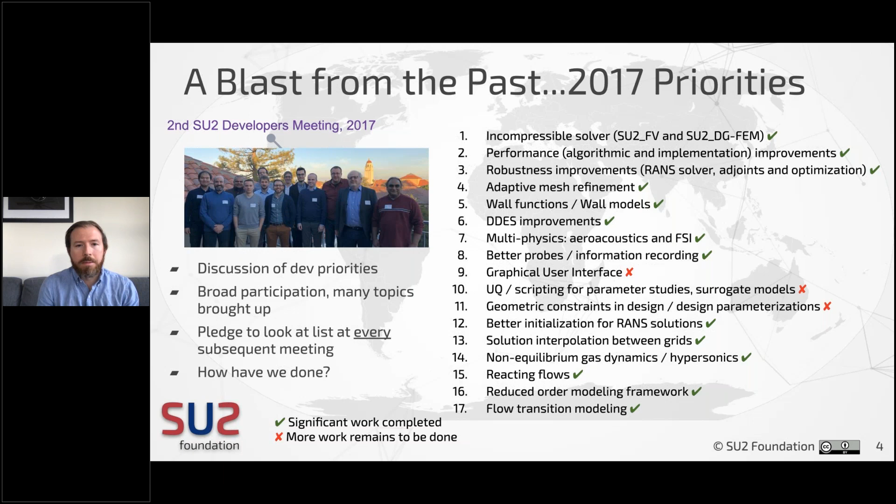Let's talk about 2019 quickly. So last year we did things a little bit differently. What we had was a set of breakout sessions where we tried to divide up the folks that were in attendance into some groups so they could talk about separate areas in smaller groups a little more effectively. One team was looking at MDAO, another was looking at flow physics, and another was looking at robustness, performance, scalability, and V&V. Sort of a long acronym, but we broke into these groups and sat down and talked about what things we wanted to work on in the code in those areas and how we were going to divide that work and tackle it.

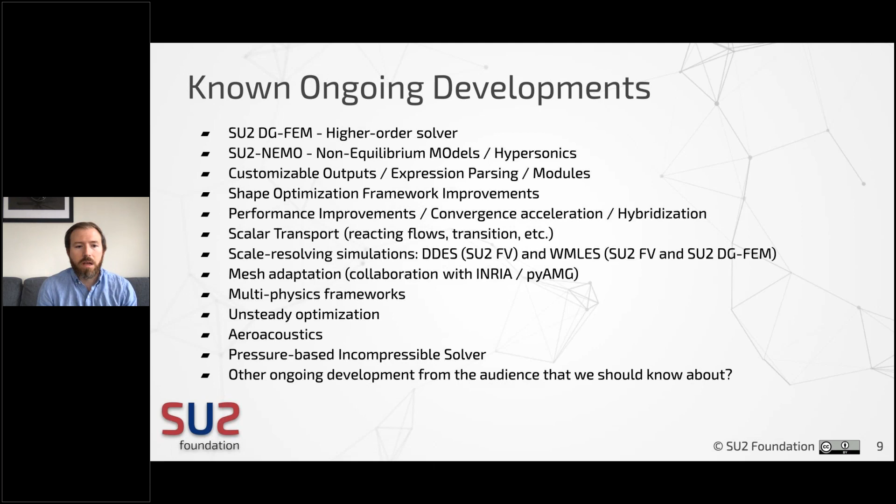What you see is basically a high priority for your needs, or things you're really interested in. A lot of these topics folks are already working on, and there's a lot of work already happening, but we want to get the pulse of the community so we know what resonates the most with people, and how we can focus our development over the coming years.

So we prepared six polls for all of you to give us a little bit of feedback as to how we should direct our efforts as a community over the coming year, and as Tom mentioned earlier, what kinds of things you would like us to be talking about next year at an annual conference that hopefully will take place in person.

So we'd like to give you a little bit of an idea of what these polls are going to be about, so you get the rough categorization and the various elements in there. There are six, as I mentioned, and we'll go through them one through six.

The first one talks about issues related to numerical methods, basic discretizations, and robustness improvements inside SU2. Again, a lot of things we've talked about through the years, but if you select some of these, we'd like you to give us feedback saying that if it's being done, we need to do more of it, and if it's not being done, we need to put it on the list of things we're actually working on. So you see things like linear and nonlinear solvers, new preconditioners, algebraic multigrid, higher order discretizations, which include a lot of effort in DG at the moment.

But maybe other things within the finite volume solver, the ability to be more robust to different transients in the initial solution, but also to poor grids, to anisotropically adapted grids, which there'll be a talk on afterwards, and then also just investing effort in advanced discretizations.

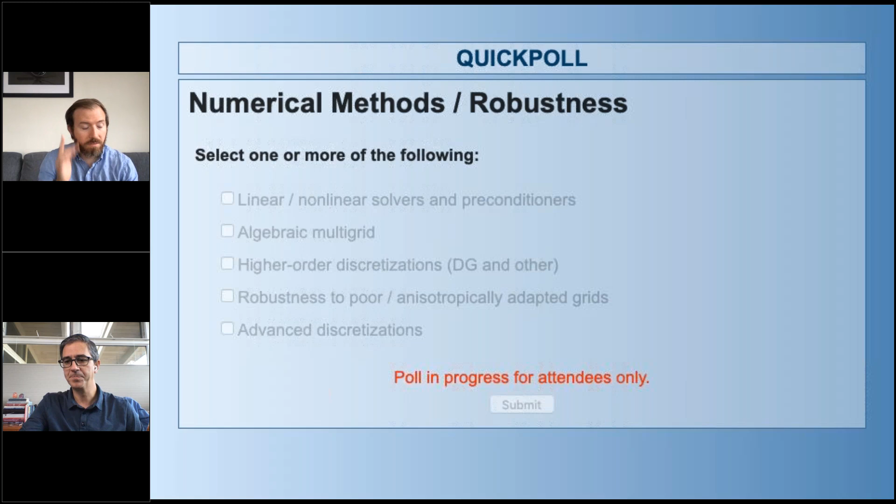So again, you're not simply voting for things that we're not doing that we ought to be doing, but things that we are already doing and need to continue to do well and do more of if possible. So I'm going to stop the poll now. About 65% of you have voted. Let me share those results. We won't do a lot of analysis, but this is very useful data that will frame the rest of the conversation. That's poll number 1. You can see robustness is important, and linear solvers, nonlinear solvers, and preconditioners are quite important, so we'll continue that. High order discretization comes in 3rd.

Let me throw up the second poll, which is about physical modeling. Again, we'll give you a minute to fill out the entire poll. Go ahead and click away as to what you think are the most important things to pursue in physical modeling over the next year. Of course, these are sustained efforts that have been going on for a while now, but we're quite interested in your opinions. 20 more seconds, and then we'll stop the poll.

Already 60% of people have voted, which is amazing. Thank you for being so engaged. Yeah, that's great. 5 more seconds. If you haven't made up your mind, go ahead and do that, please.

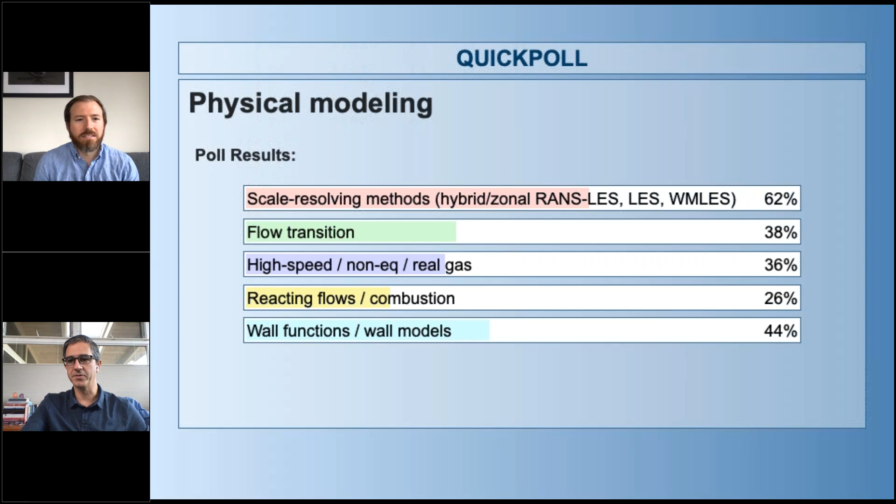And here we are. Let me close that poll and share the results with you. You can see it's a bit of a mix, but scale resolving simulations is probably in the lead, and there's a lot of interest in the other various areas as well. We'll take this into consideration, but in the interest of time, so we have lots of time for discussion, let me just keep going.

The next poll is about performance, and we focused on strong scaling because that's typically the use case we see in SU2, but it's not only restricted to strong scaling. Go ahead and vote for the top 2 things you want to see there.

I have to say, seeing the results, not many surprises. Again, almost 60% of people have voted. You guys are amazing at responding very quickly, so we don't have to spend very much time on this. I think 3 more seconds, and then we'll stop.

Let me show you the actual results of that poll. We have hybrid OpenMP/MPI, GPU, very unsurprisingly in the lead, and then the other 3 very close to each other. Excellent there. Yeah, that was pretty even.

So let's go to multi-physics and interfaces. Very curious as to what you guys think are the top things we ought to be doing.

I'm sure there are others, by the way, and while you're voting, Tom has mentioned this before, but in either the chat window or the questions, if there are things you don't see in many of these polls, please throw them in, because we will put together a survey for all of you after the conference, and we'll add those new things in.

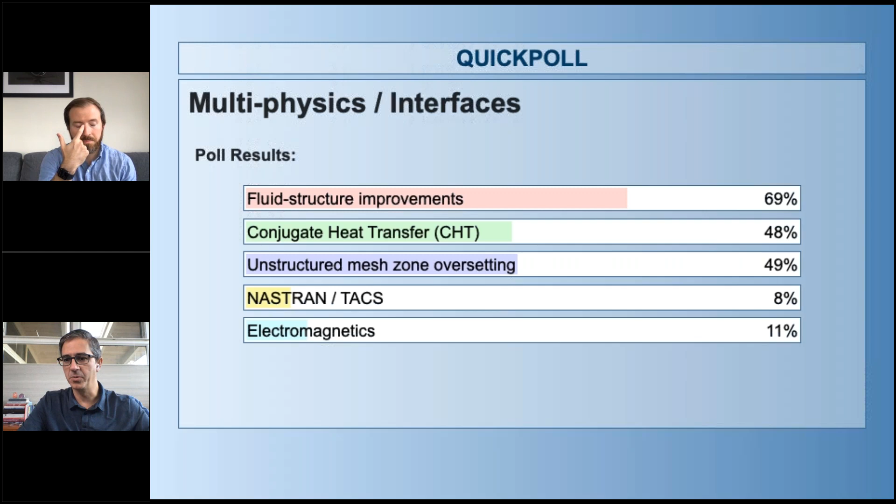2 more: adjoints and optimization. Please do the same thing, top 2 choices. What are the things you'd like to see more work on during this particular year?

Again, the votes are coming in very quickly. I'll share those with you in about 10 seconds or so. We're at 50%. 5 seconds, and we'll stop. Let me show you those results.

Very interesting as well, Tom. I don't know what you think, but obviously shape parameterization is something we need to continue to pursue. A lot of mesh deformation approaches to go with those new shape parameterizations, and then optimization is good.

Then last but not least, this is a really important one, although it's probably the last thing people want to work on. Please go ahead and select, just as you've done, the top 2 among the 5 choices you're given here.

So again, better code organization. It's always useful to get people going - unit and regression tests, documentation, tutorials, and so on. And events, and better interfacing with the code to automate various different tasks.

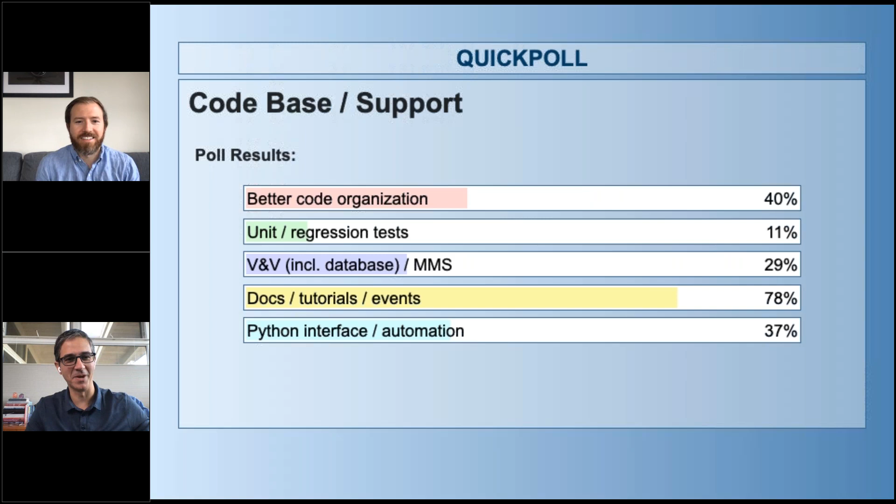So we have 65% voting, so 5 more seconds, we'll stop right there. Let me just share with you what the results of that poll are. Obviously, a lot of interest in documentation, tutorials, and organizing events. So as we have bandwidth to do that, we probably have to pay quite a bit of attention to it. I think that's the most clear one so far.

Tom and I often get requests from people who want to teach a CFD course using SU2. And the first thing everybody asks is, has this been done before? Are there materials that we could inherit in order to prepare such a course? How does it work with students? And so on.

We used to have a version of the code, SU2 EDU, which by the way still works, which is a stripped down version of the solver that is a very good vehicle to actually teach people how to learn CFD and how to write CFD codes, etc. So we could connect with all the people interested in doing this. If you're interested, reach out to Tom and myself or to anybody else on the foundation board - Ruben, Tim Albring, and Eran Arad - and we'll be happy to do something about this. There's been a lot of interest at various institutions, and courses have already been taught in multiple places. So we'd love to be able to facilitate all that.

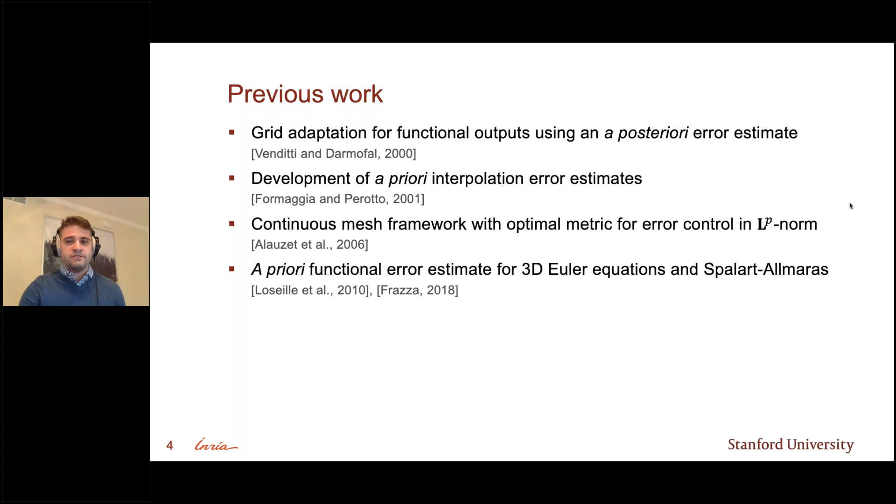It kind of reminds me of this interview with Tom Economon that I saw once, where he said that he judges the quality of a mesh using the eye test. So Tom, maybe at the end of this, you could tell me if this mesh or some of the other meshes you see actually pass that eye test.

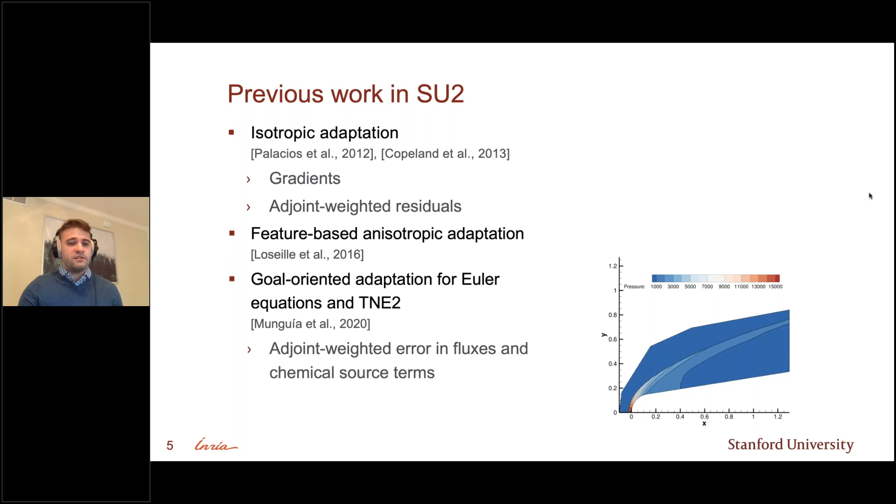And then much more recently, I, along with Wally Maier and Jacob Needels, published a paper at the Hypersonics conference where we did goal-oriented adaptation for the TNE2 equations for hypersonic flows, which consisted of an adjoint weighted error in Euler fluxes and chemical source terms.

And whichever framework you use, whether it's feature-based, goal-oriented, a priori, a posteriori, in order to get anisotropy, we need this notion of a metric space, which I'll describe briefly here. So in our finite volume method, we assume we have piecewise linear elements, so essentially constant gradients in our elements.

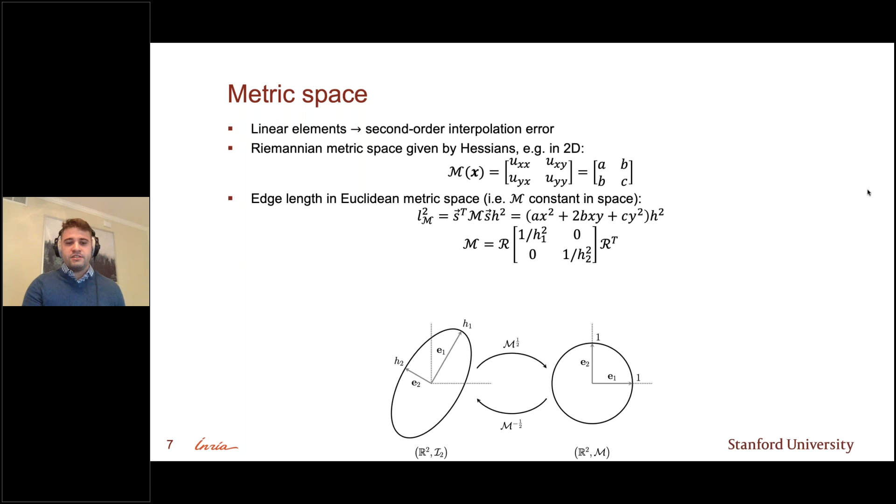A lot of times you'll see people visualize these as ellipses. In order to equidistribute the error, we want a constant length in this metric space. If we set that to 1, the eigenvalues of our metric tensor are inversely proportional to our desired lengths in the output mesh in those principal directions. This makes sense - if we have a shock wave, most of our variation happens normal to the shock wave, so we'd want most of our refinement in that direction, and you'll see elements stretched along the shock wave.

In reality, the edge length is a bit more complicated because the Riemannian space is a continuous space, so we actually have to integrate these metrics in space in order to perform our mesh optimizations. That's all handled in AMG.

I mentioned this before with the optimal metric, but we have this discrete-continuous duality in this continuous mesh framework. The continuous analog of our elements K is our metric tensor M at each node throughout the domain. The mesh X is related to the Riemannian metric space itself. The number of vertices N is related to what we call mesh complexity, which is the integrated density in this continuous space - this is what we actually control in our framework.

So the optimal metric is a normalization we perform in order to minimize the error in some LP norm. We have to perform this normalization because, if you think about it, before we were just computing Hessians, but the scale is kind of arbitrary and very problem dependent.

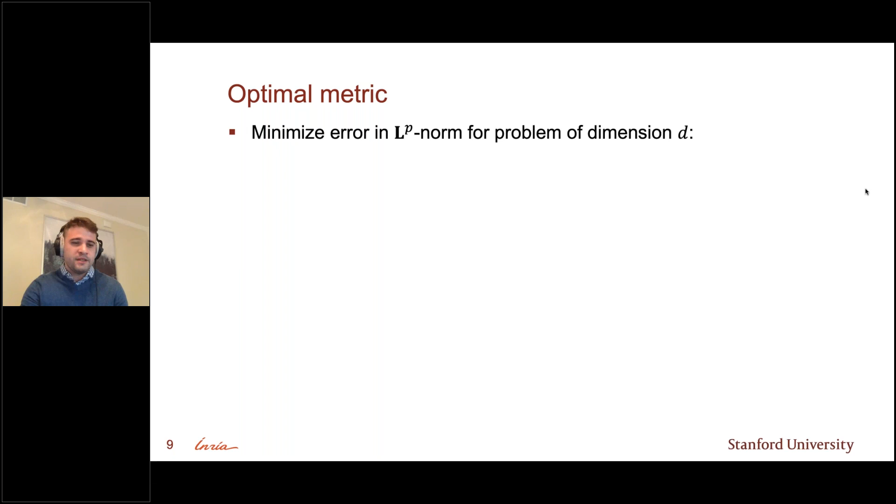The third term is a local normalization we perform in order to damp out small amplitude variations in our metric space. We have two free parameters here: N, which we use to drive refinement in the mesh, and P, our choice of norm, which is mostly dictated by the problem. Larger P's tend to damp out small amplitude variations more.

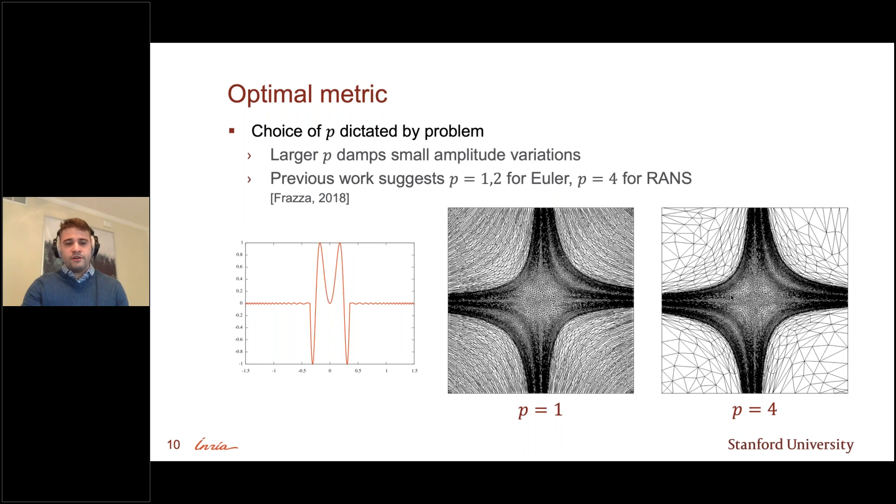Loic Frazza basically suggests in his thesis that p equals 1 or 2 works well for Euler, mainly for capturing shocks, and p equals 4 works well for RANS, where we have different scales in our flow that we need to resolve, and we want to damp out other features.

So in order to get into the viscous error estimate, I'm going to motivate a little with how we do the inviscid error estimate. This is what I, Wally, and Jacob did for our TNE2 paper at the Hypersonics conference. We approximate our error by linearizing about the flux terms and also chemical source terms in the case of TNE2. Our residual is just the standard form of divergence of fluxes minus our source terms, which is hopefully equal to 0.

We assume that our error is an adjoint weighted interpolation error of these terms. H denotes a discrete quantity and U bar denotes our adjoint variables. We want to extract a linearization about F and Q. Q is already in the right form, but in order to get F, we integrate by parts and neglect boundary terms, and what we get is this here.

So now we weight our errors of our Euler fluxes using gradients of adjoints, and now we have an error estimate.

Like I said, we're using Hessians to approximate our error, so we take Hessians of these linearized terms. We have this adjoint weighted Hessian, which is given by gradients of adjoint variables weighting Hessians of each of our Euler fluxes, and adjoint weighted Hessians of source terms. Then we perform the LP normalization that I described before. This works all right for the Euler equations and TNE2.

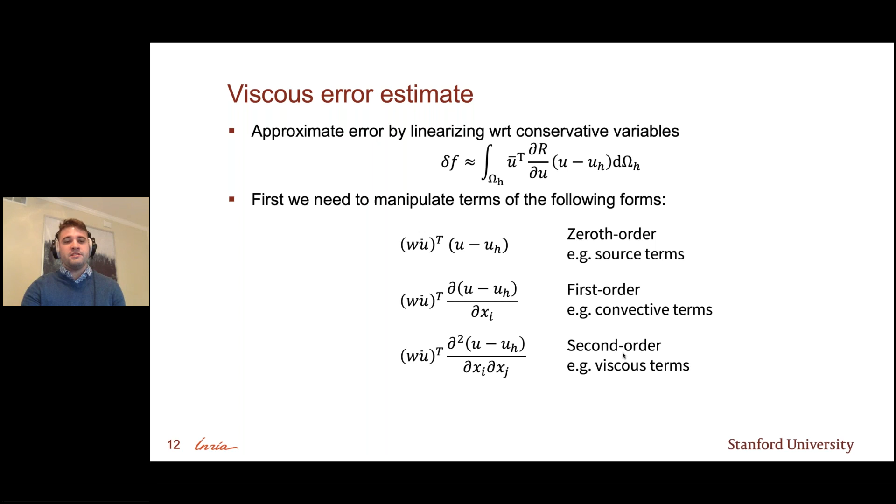In order to linearize these, once again neglecting boundary terms, we integrate by parts twice. So now our error estimate with respect to our conservative variables is this Hessian of adjoint weighted error. These terms W and all these terms come from our Jacobians, which, like I said, we already have in SU2, so that's easy enough.

Just to give a brief example of how we do this: if we look at the error due to the divergence of heat flux in the energy equation, we have this Laplacian of temperature, which we can decompose into a Laplacian of energy and a Laplacian of density. If we integrate by parts the adjoint weighted error of that, then just looking at the energy term, we have this Laplacian of adjoint energy that weights our interpolation error of our actual energy primal variables.

So in compact form, we have this adjoint weighted Hessian composed of 0th order, first order, and second order weights as shown here. Then once again, we normalize that to obtain the optimal metric that I described.

In order to do this for SST, which is kind of a messy equation, I made some simplifications. These blending functions I treated as constant because I assume they don't really contribute much to the error—they're just used to switch between K epsilon and K omega. Quite honestly, I didn't feel like linearizing with respect to hyperbolic tangents of inverse cross diffusion and all that nonsense. I don't treat the limiters on shear stress or production, so I don't really treat these maxes. I just use a simplified version of these terms.

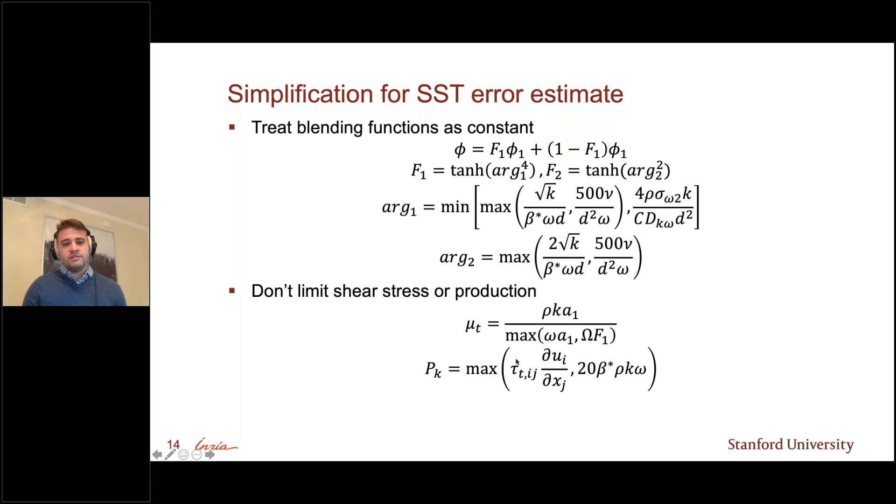But then I linearize with respect to everything else in the equations of motion, including viscosity and thermal conductivity, which helped me later implement actual Jacobians for these terms. And that leads into the modifications I actually made to the Navier-Stokes solver and SST solver in order to get these flows to converge.

Because, like I mentioned, when Victorien Menier first implemented his mesh adaptation framework, he had some robustness issues, specifically with RANS flows.

So one, I store the conservative turbulent variables because while in master and develop we store the primitives, our adjoints are with respect to the primitive variables. Our error estimate is actually in terms of the conservative primal and adjoint variables, so I just store these extra variables in this variable structure.

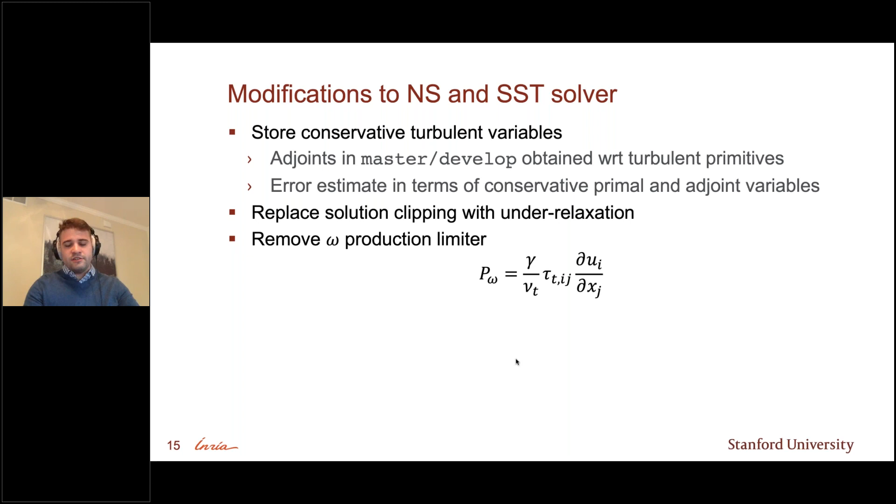I got rid of the solution clipping, which seems to be a band-aid for a lot of other problems in the SST solver, and instead use under relaxation, which works fine with all the other modifications I've made. I also got rid of the omega production limiter, because I think that extra specific dissipation helps with convergence.

Our wall boundary condition for omega is given by this equation, where delta D1 is, as described in the original paper, the distance to the first off-wall node. In SU2, we use the normal neighbor and the distance to that node, but for my highly anisotropic meshes, like the one shown here, that distance doesn't give an accurate representation of what omega should be. Since this equation is based on boundary layer theory, I instead used the actual wall distance to that node. I won't go into detail, but this thesis describes a more stable version of a gradient correction at our interfaces for viscous fluxes, which I implemented.

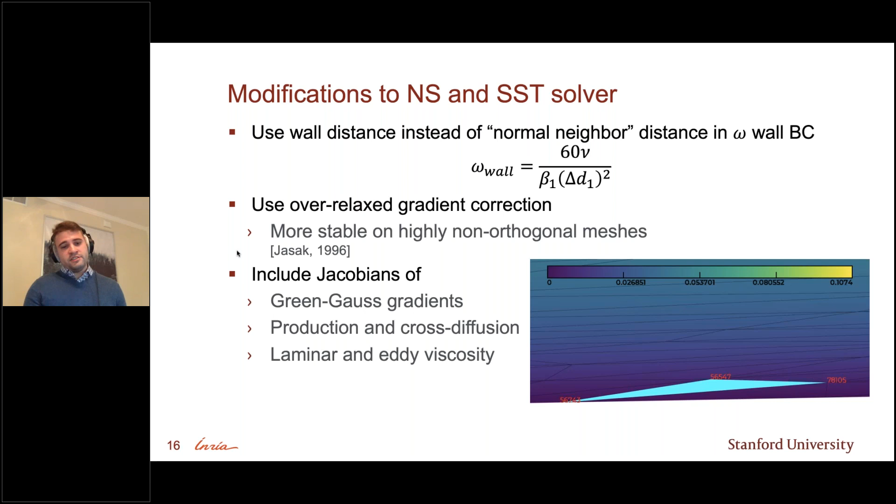I basically linearized pretty much everything that wasn't linearized before. I only did it for Green-Gauss, but I linearized the actual gradient computation routine, whereas before we just linearized the gradient correction terms at the interface. I also linearized the production and cross diffusion terms, and all the viscous and heat capacity terms.

So onto the actual framework itself. Essentially, we have this adaptive loop where we run a flow, adjoint, and metric computation in SU2. The metric computation is just a post-processing routine in the adjoint driver, computing those adjoint weighted Hessians of our conservative variables. I have this external library, mostly written by Victorien, which I converted into an external library. It essentially converts from SU2 format to the gamma mesh format used by AMG. AMG performs the actual mesh adaptation based on this metric and interpolates the solution onto the new mesh, and this whole process repeats until we converge our problem.

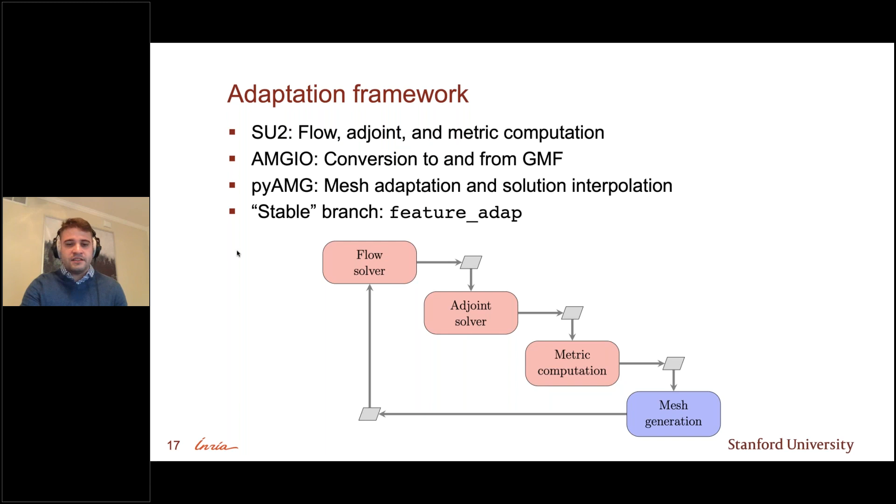If anyone wants to run this today, there's a stable, in quotes, branch in the feature_adap branch. I wouldn't recommend running the RANS stuff yet, as that's highly experimental. But if you wanted to run, for example, inviscid or just Hessian-based mesh adaptation, I'll describe some of the options available. Currently, AMG is limited to triangular and tetrahedral meshes, so make sure you generate a mesh that's tris and tets only.

You can specify what's known as a background surface mesh, where we have a fine representation of the surface. Even if you're doing RANS, this can be an Euler mesh, because AMG just uses it to generate a P2 and P3 approximation of the surface. It can be an SU2 or GMF format, and if you don't specify a mesh, it just defaults to the initial mesh that you use.

You can choose whether or not you want AMG to perform ridge detection, which detects important edges and corners in your geometry that it should try to preserve. If you don't want to use ridge detection, at least for the 2D case, I wrote a Python script that takes the intersection of markers in the mesh and uses that to determine corner points. In this example mesh, I had an airfoil split into upper and lower surfaces, so it detected 2 corners, and I just append these 3 lines to the end of my mesh file.

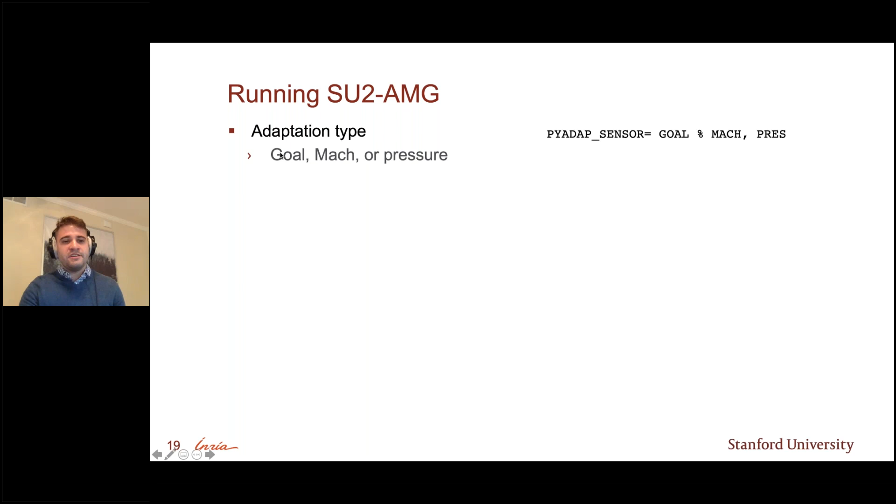The user can choose which type of adaptation they want. If you specify goal, then you need to define an adjoint problem. Target complexities is this idea of mesh size, or roughly proportional to the mesh size, and usually I pick the first value to be about the size of the initial mesh, and then increase from there. There's also the number of actual adaptations to perform at each mesh level, and the norm that you choose to use.

To illustrate what this might look like in SU2, the K omega model is known to have significant drop off in K and omega at the far field boundary. So P equals 2 might refine that a lot more than P equals 4, which, like I said, higher P damps out small amplitude variations a lot more.

Maximum cell size is just to prevent the mesh from getting too large at the far field. Minimum cell size seems to be more important for RANS, at least for SST. If I let this get below like y+1, I would see divergence a lot of times.

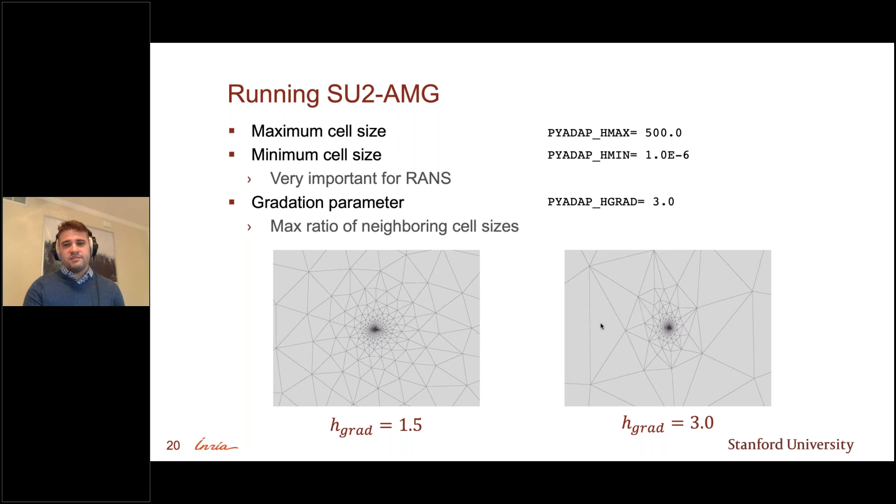Gradation parameter is used to smooth the mesh by capping the maximum ratio of neighboring cell sizes. For example, here I'm showing hgrad equals 1.5 and hgrad equals 3, and you can see the gradient in cell size is obviously larger in the case on the right. 1.5 to 3 is about the range that Adrien Loseille recommends for CFD problems.

I think that affects, one, the metric itself, and two, just the solution quality.

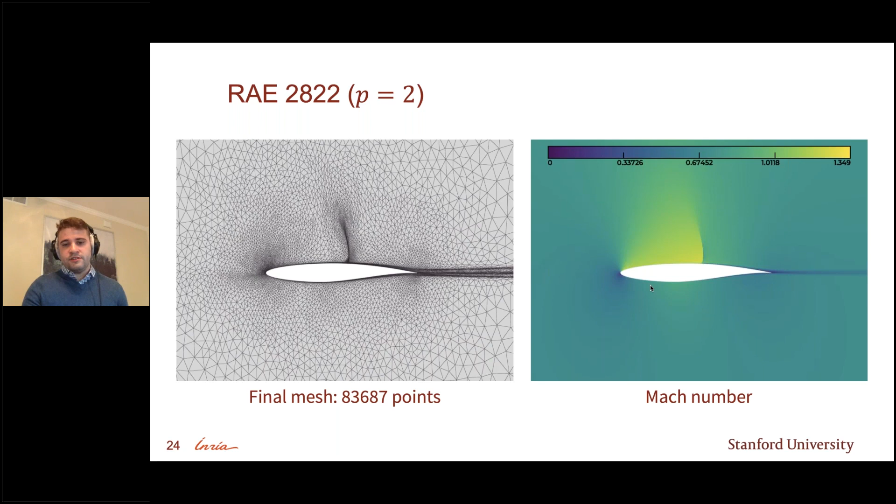If we show Mach number, we can see the boundary layer and the wake actually captured in the flow itself. In the region where the shock meets the boundary layer, we get a good mix of length scales that are captured pretty well, and it's even starting to capture this oblique shock that comes off of the boundary layer just forward of the normal shock wave.

In conclusion, I implemented error estimation and goal-oriented mesh adaptation for the Euler equations, the TNE2 equations, which I didn't really show here but you can find in the paper we published at the Hypersonics conference, and most recently the SST equations, demonstrating the ability of this framework to work for viscous turbulent flows on the RAE 2822 airfoil.

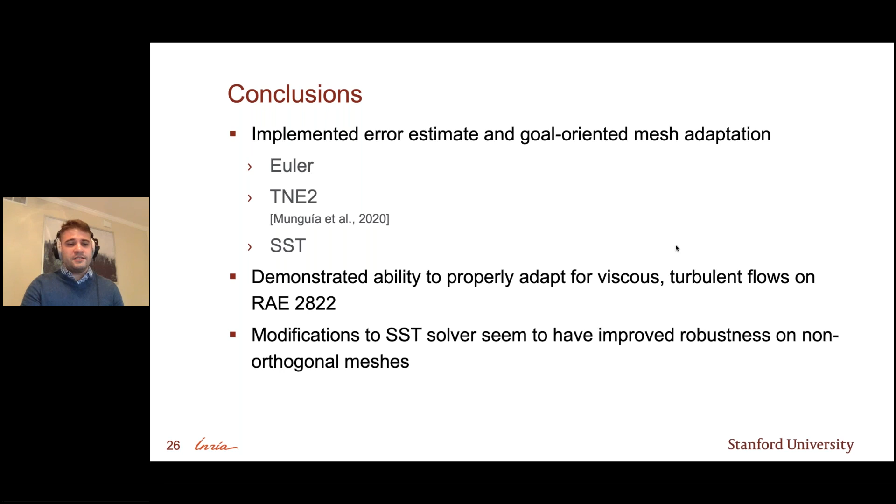Finally, the modifications I made to the SST solver and the Navier-Stokes solver seem to have improved some of the robustness issues we've seen before on highly non-orthogonal meshes.

Future work for the project: first, a more thorough investigation of the effects of some parameters like the norm and gradation parameter. The norm in particular, because I was seeing better results with a lower norm in RANS mesh adaptation, which somewhat contradicts what Fidkowski suggested, but I think that might be more solver dependent than anything.

Implement error estimates for other models, like Spalart-Allmaras, which could just be based on Fidkowski's error estimate, and incompressible flow. Some of my colleagues and I have talked about implementing a wall function based adaptation framework to further drive down costs, CAD based projection to get a more accurate surface to project our meshes onto, and further down the road, mesh adaptive shape optimization.

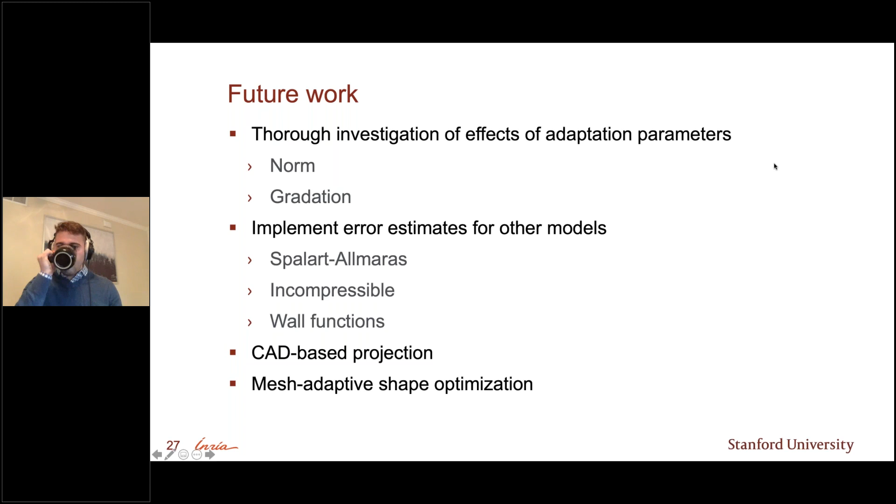Tom, I had a question also that's been sent to me. Brian, you've been talking a lot about the TNE2, which is a thermal non-equilibrium solver, Sean Copeland, right? Yeah. But we heard on the first day of the conference about the SU2 NEMO. Is the adaptation ready to work with SU2 NEMO already, or are there any steps that need to be taken in order to facilitate that?

So they've already done feature-based mesh adaptation with NEMO, which Katerina showed in her talk. They adapted based on Mach contours. As for the actual adjoint weighted adaptation, I think we would have to actually get Jacobians with respect to whatever source terms exist in Mutation++, which I don't know how easy that would necessarily be to do. The framework we implemented before for TNE2, where it was the adjoint weighted Hessians of fluxes and source terms, worked okay, but I think the full linearization works significantly better. It's a much more exact error estimate. So it would require a lot of implementation.

Okay, how about a final question, because I think it'll be straightforward, and then we'll pause for break. So someone asks, is your previous solution interpolated onto the new grid, or are you running it again from scratch? I interpolate both the flow and the adjoint solution onto the new mesh and restart from there. But the adjoint interpolation doesn't really seem to have too significant an effect on the convergence, so maybe I don't even need to do that.

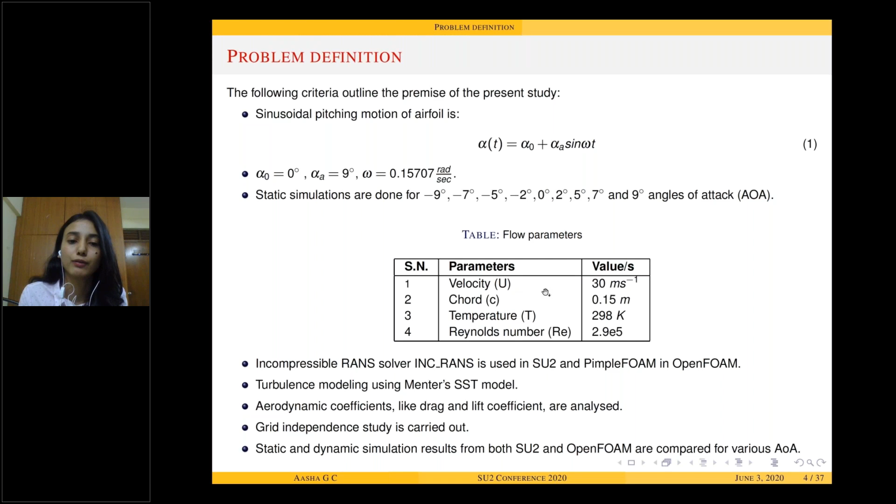0.15707 radians per second. We conducted static simulations for a number of angles of attack to compare them with the results obtained from quasi-steady flow. To model the fluid flow, we have used flow parameters as shown in the table here.

We have used the incompressible RANS solver available in SU2, which solves the equation given in equation number 2. Here, pressure-velocity coupling is realized through Chorin's artificial compressibility, and we have picked a constant density model as our density is unaffected by pressure or temperature changes.

Again, based on our Reynolds number, we had to do turbulence modeling, and we have chosen the Menter SST turbulence model to compute the turbulent component of viscosity, and dynamic viscosity is the same as mentioned earlier. Ours is a constant temperature flow analysis.

Finite volume method is implemented in SU2 for space integration, and median dual control volumes, as shown in the figure, are formed on the primal grid for the same purpose. We have used a flux difference splitting scheme for integration of convective fluxes, and also applied a MUSCL approach to achieve higher order of accuracy. Similarly, for viscous fluxes and the gradients, we have implemented the Green-Gauss method for our case.

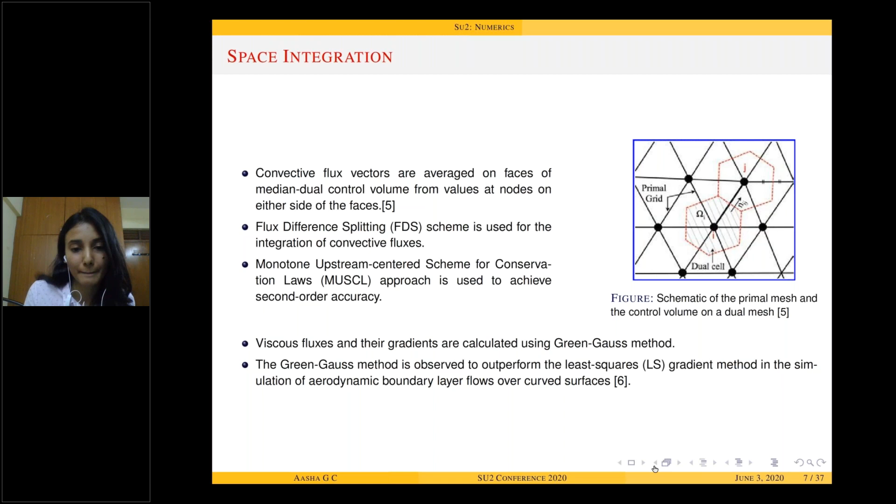For time integration in the static analysis case, implicit Euler scheme is selected, and dual time stepping second order marching method is used for the dynamic analysis case, where again the unsteady problem is transformed into a steady state problem for each physical time step. The linear solver we picked was FGMRES, and we also picked a line preconditioner.

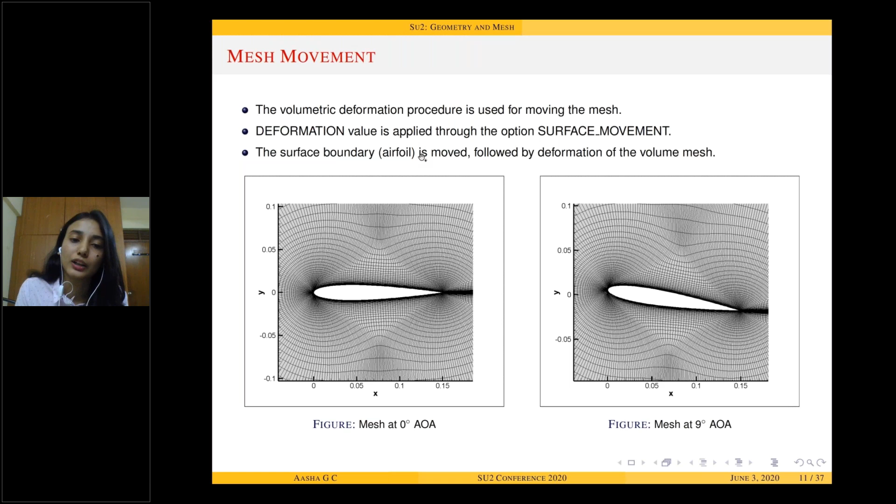For oscillatory motion, we needed mesh movement, and we picked the volumetric deformation procedure in SU2. These are the pictures captured at 0 and 9 degrees angle of attack obtained by the volumetric deformation procedure. Here, first the airfoil moves because we have given that as the boundary surface, and accordingly, the whole volume of the mesh deforms to accommodate the changes.

We did grid and time independent study. For grid independent study, we picked 3 progressively fine grids, and based on the results, we picked mesh number 2 with 256 points on the airfoil. Similarly, for 3 different time steps, we conducted time independent study over the course of half cycle, and based on the results obtained, we used 0.11 second as the time step for our current case.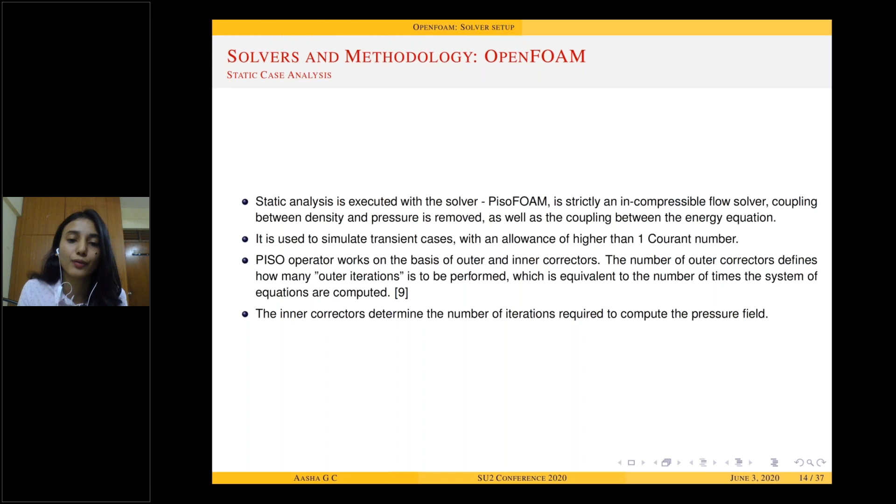To compare the results obtained, we used another open source CFD platform, OpenFOAM, and the conditions were made as same as possible. For the static analysis case, we used PisoFOAM, which is an incompressible flow solver. And for the dynamic analysis case, we used the PIMPLE algorithm with displacement Laplacian mesh morphing methodology.

Coming to the results, we have sectioned the results as velocity contours, pressure contours, streamlines, and flow coefficients.

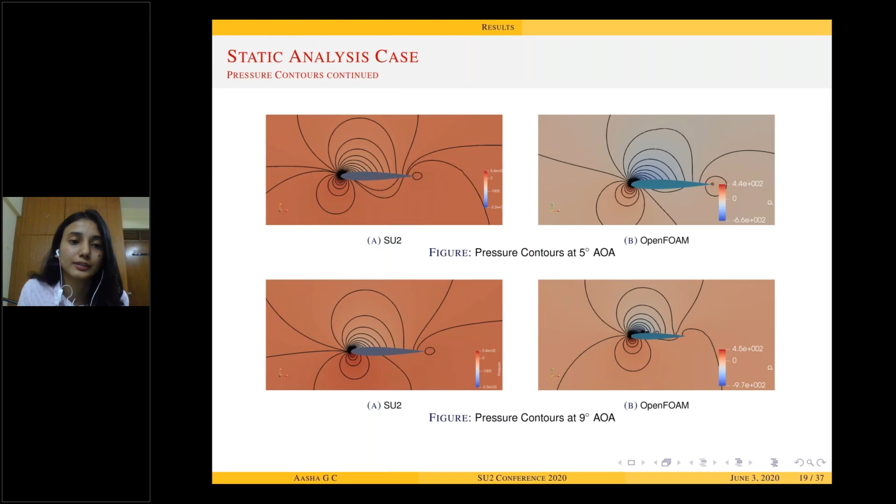The pressure contours show the same nature as velocity contours. We have plotted them for the same angles of attack for each section. And similarly, the streamlines show the same nature as shown by the previous contours. There's no fluctuation, there's no boundary layer turbulence formed.

To verify the mesh and numerical algorithm we used for the study, static simulations were conducted based on the specifications given in NASA's Langley Research website for the SST turbulence model, and the results obtained for 10 and 15 degrees angle of attack showed less than 1% deviation. So we thought we are good to go with the given mesh and numerical algorithm.

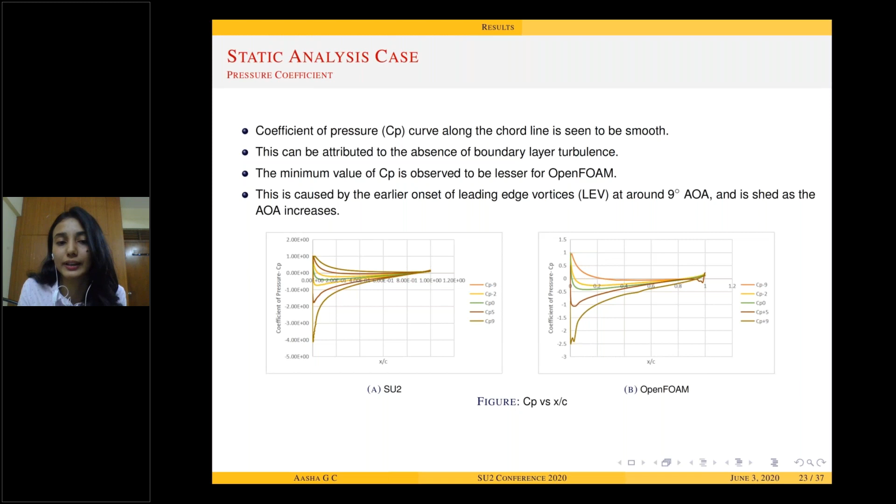We have plotted a CP curve along the chord line for selected angles of attack, and they are seen to be very smooth, which again shows the absence of boundary layer turbulence.

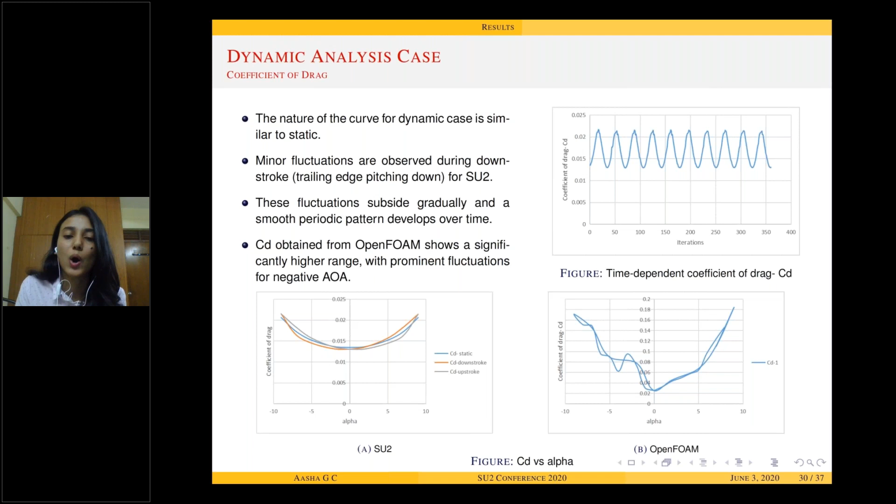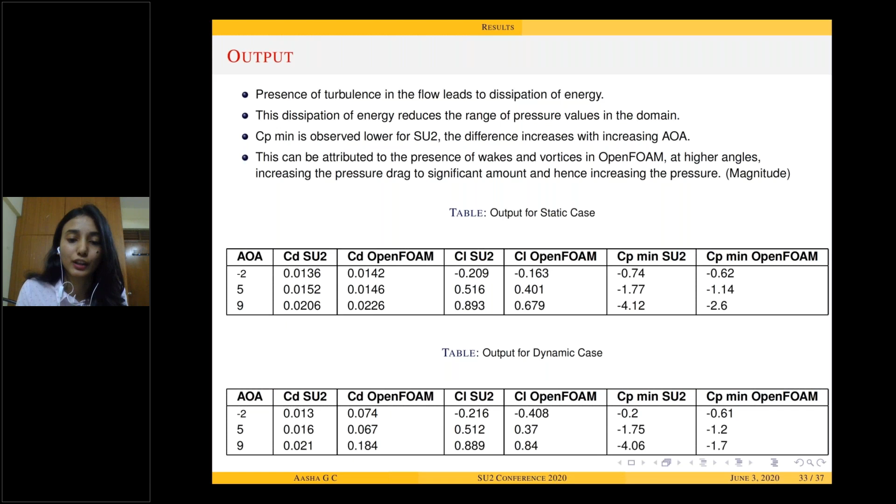So in conclusion, the static and dynamic results are observed to be in good resemblance with each other, which is in accordance with the quasi-steady nature of the flow. Over the course of a few cycles, flow parameters developed a steady periodic pattern as seen in the previous slides. The major difference was seen in the values of CD for the dynamic case, which differed by 0.16.

This could be attributed to the different mesh morphing mechanisms used in both software, and also to the boundary layer turbulence formed, because of which kinetic energy of the fluid gave rise to wakes, and leading edge vortices were formed and shed at 9 degrees angle of attack.

So overall, in conclusion, for low frequency quasi-steady conditions, we can agree that static and dynamic cases are found to be similar. Also, we intend to compare and see the results for CM, CF, and boundary layers.

Coming to the future work, we intend to run more cycles for both software and find out the differences in association with the respective modeling techniques and solver algorithms.

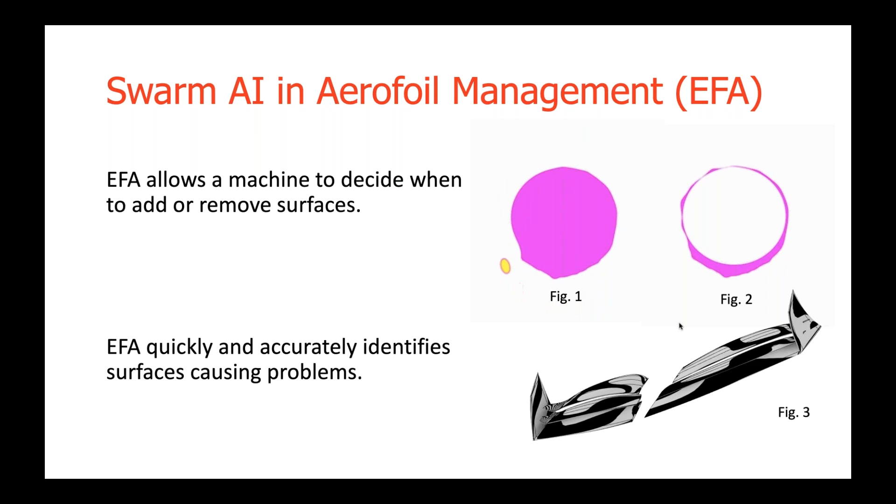One of the most important parts of machine learning is unsupervised learning. This is taking information from our data input and trying to find the key variables, the things that really make it tick, so that we're giving our machine less to work with and less noise and fluff.

Neural networks work best with fewer input dimensions, and this is why we're using Bezier surfaces instead of complete pointwise meshes. Bezier surfaces, if you think of a puppet controlled by a couple of strings by a puppet master, can create very complex and realistic movement. It's a similar idea with Bezier points - you have a couple of control points that can dictate these very complex surfaces that we can use to design our aerofoils, giving a machine a little bit more autonomy when it's designing them. So instead of telling it to do it our way, we can let it do its way.

Now, this is the first novel contribution to this talk. We talk about using the backpropagation algorithm to transform Bezier points in space. So instead of asking a neural network to look at some data and transform it the way we want, we say these are literally the Bezier points we are feeding. We give it to the network, run it against SU2, and get outputs - a drag coefficient, a downforce coefficient, for example - then we backpropagate that through the network so we can identify the points causing the most error, the most drag, the least downforce, and so forth. This is commonly applied for other tasks like image recognition, but it's about taking the abstract idea that underlines machine learning and applying it in a slightly different way to suit CFD.

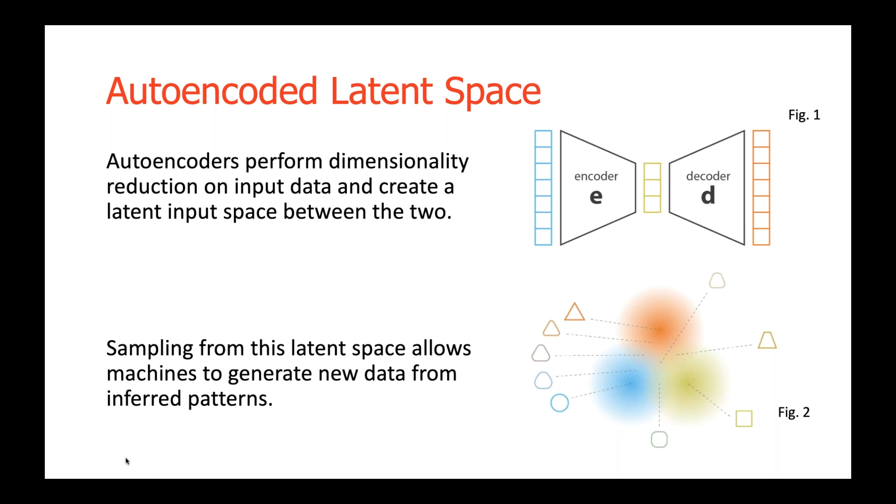Thank you. So we can train an autoencoder to recognize certain types of wings. In this particular example, I've used a mock Formula One front wing, and I've trained it to encode and decode types of this wing and modifications of this wing, permutations, to create a rich latent space.

Where the machine has a good understanding of what's important in a front wing, what are the key variables, what points matter more than others, and what's a bit more generic, like the wing end plates - they pretty much don't change, but the surfaces in between, the heights, the rides, the curves, all that sort of stuff.

It's not enough to create a latent space, however. We need to think about how do we direct a machine towards doing something with this latent space? How do we teach it to infer some new information, some new designs from this?

So we go back to the previous idea where we talked about the movement of points and adjusting points and trying to make better surfaces and better aerofoils from the ones that we started out with. And we use this to create a richer latent space.

And we can encode various data here, and we encode it down into latent space, and we assign it the error function. So if we have a wing that's very badly performing, we give it a big error function, and we say, right, this has a big divergence, stay away from this point, pushing our network away from this. If we have a wing that's doing quite well, we don't push it away from this point that much because it has a good performance.

And by naturally following the divergence of these points, we can get to an optimum value locally at the very least.

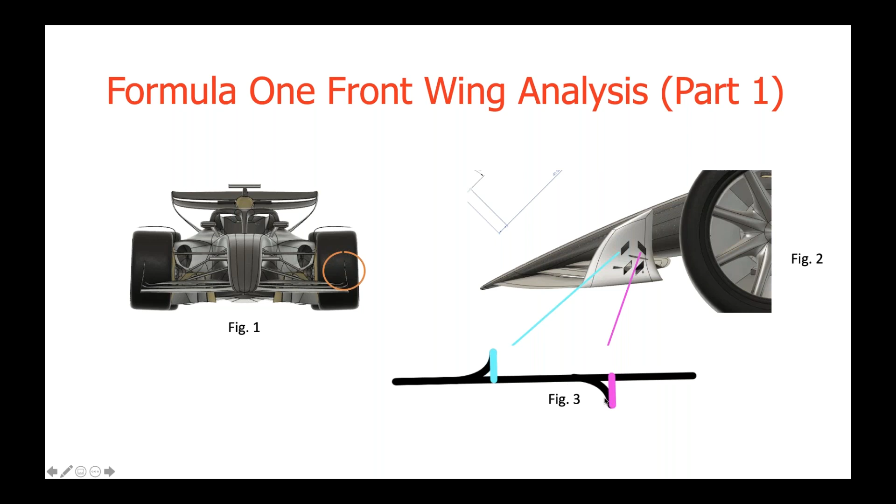So when I first looked at this, I'm not an aerodynamicist, I had no idea what it was doing. It becomes a lot more interesting when we run it with some simulations, and this was really cool.

What the machine had decided was that the tires of the Formula 1 car were the biggest source of drag. There's a lot of drag, there's no downforce, they don't serve a whole lot of purpose, but it couldn't get rid of them because it wasn't optimizing the tires, it was optimizing the wing.

So what it did is it put these holes in the end plate here so that there would be a pressure sink created and it would deflect air away from the tires.

When you have the wings here on the Formula 1 front wing, it's a very simple aerofoil, you have high pressure on the top, low pressure on the bottom, and the placement of the holes by the network would pull this high pressure air out and away from the wheel, and also would allow the channels here that are further away from the end plate to go undisturbed and into the floor diffuser here.

So to finish this up, I thought it was important to talk about why SU2 works for AI and CFD. You couldn't run this on other software. It's something that's very well suited to SU2 because SU2 is a research and academic driven simulation lab. It's not dictated by large companies. It doesn't have margins to meet. It doesn't have project requirements that you find in enterprise. It's open source. It's available to the community. And it's a really interesting example of innovative work when you release something to the community.

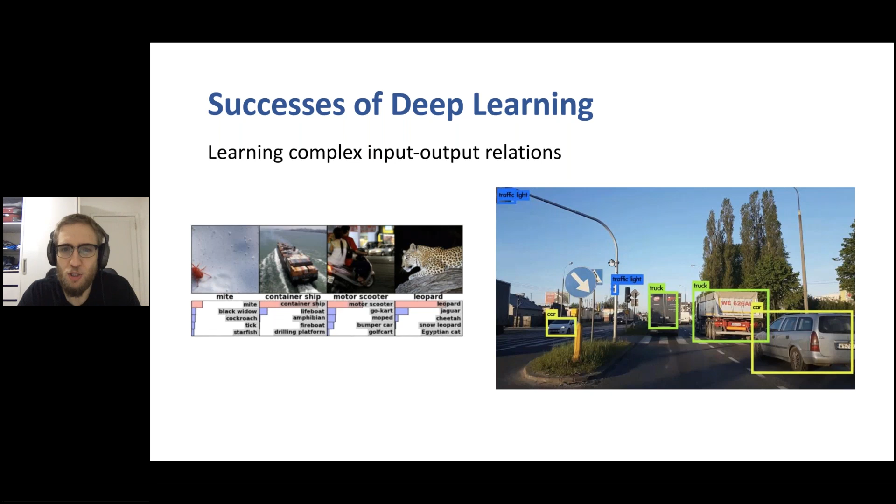Over the past decade, deep learning has been successful in solving diverse tasks, especially in the visual domains, with a few examples in object detection and classification presented here. And of course, everyone here knows that performing CFD simulations can quickly become very complex and computationally expensive. So recently there has been a lot of interest in exploring the usage of machine learning methods in order to predict fluid flows in a more efficient manner.

Many of these recent works employ standard convolutional networks to this problem, which are basically the default type of model used when dealing with structured data such as images for visual tasks. But this approach comes with some drawbacks. Since these methods employ standard convolutional networks, they are not directly applicable to traditional CFD problems, which are often formulated using unstructured meshes. This requires the problem to be converted into images with predictions also made as images instead of the natural CFD meshes.

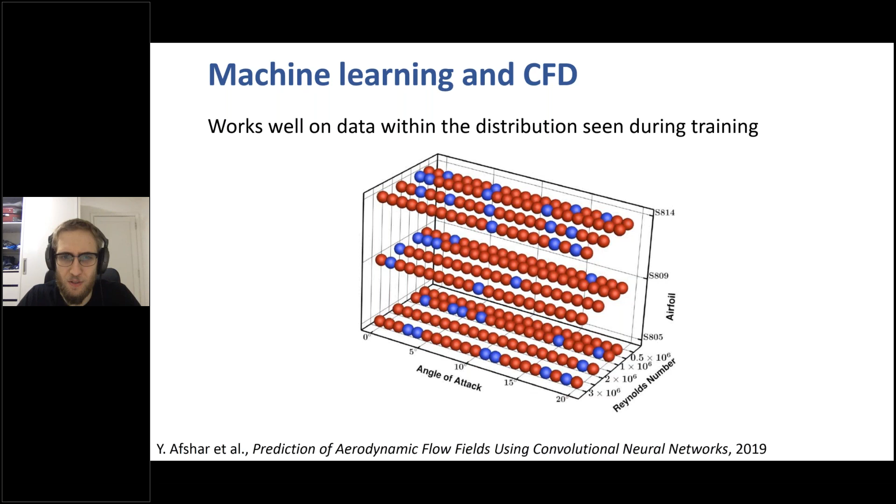In order to address these issues in this work, we develop an architecture that combines both graph networks and a CFD simulator, which is SU2 in this case. Graph neural networks are a type of machine learning model that has increased in popularity recently due to its ability to process more general and unstructured data represented as graphs. The usage of graph networks here enables our method to work directly on non-uniform meshes, allowing the flexibility to accept CFD problems in their native formulation. We also embed a differentiable CFD solver into the model, which allows it to take advantage of traditional fluid simulations, enabling better generalization while still allowing the model to be trained end-to-end, meaning all components are trained at the same time by differentiating all the parameters with respect to our objective.

For us to be able to use SU2 in a deep learning model, it needs to be able to interact with the deep learning components, in this case represented by PyTorch, which is the framework we use. To this end, we developed a PyTorch interface that allows SU2 to be used as a regular deep learning module inside a larger model.

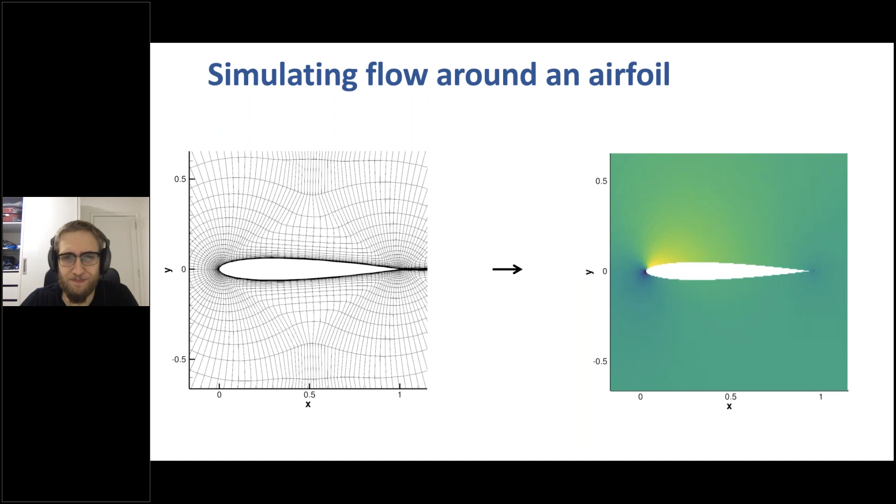Having defined our task, let us look at the full model now that we will be using. We call the model the CFD GCN, as it combines graph convolutions and CFD simulations. So we're going to take a look at it part by part.

The first thing, as mentioned before, is we take as input the meshes used for the simulation instead of images. Our model takes as input both a fine mesh, the full mesh we wish to use to predict the flow, and also another coarser version of that full mesh. In order to be processed by the model, these two meshes are represented as graphs, where each node contains the position of the mesh node and also its signed distance function from the airfoil. This helps the network encode better information about the mesh we're dealing with.

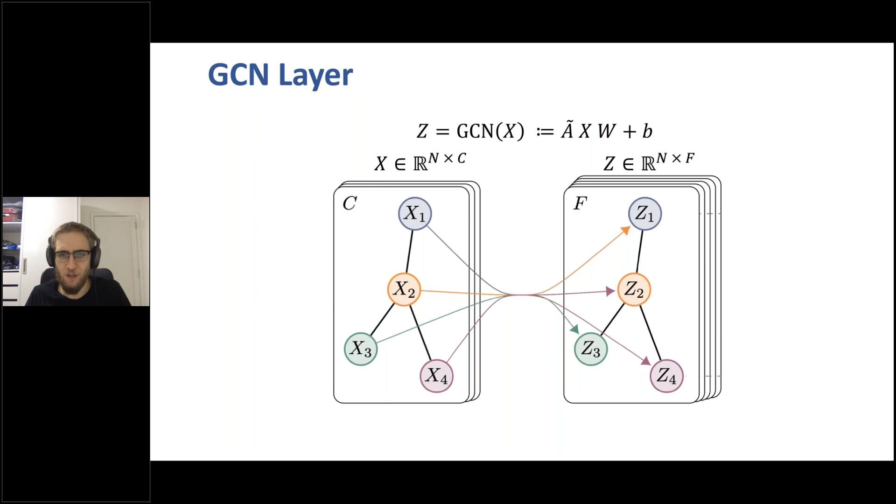The mathematical formulation of the update is presented in the slide, but at a high level, the GCN layer takes in the features at each node, aggregates information from neighboring nodes, taking into account the graph connectivity such as the degree of each node, and maps this to a new feature representation per node using a learnable linear transformation. When you stack a bunch of these with nonlinear activation functions in between, you can learn very complex functions on graph structure data.

Finally, after defining our model, we take the loss on our predictive flows, comparing the predicted flow to the true flow, and then differentiate that to update the GCN weights by backpropagation, which means updating the parameters using the derivative of the loss. But on top of that, due to using SU2 and its differentiation capabilities, we can also backpropagate this error through the CFD simulation so that we can optimize the coarse mesh by changing the position of every node in order to further reduce the loss. Thus the model can be fully trained end-to-end.

This is a model with many moving parts, and as such we tailored our experiments to ensure the contribution of every part. To do that, we analyze a few ablated versions of the full model. I'll go over those before looking at the experiments.

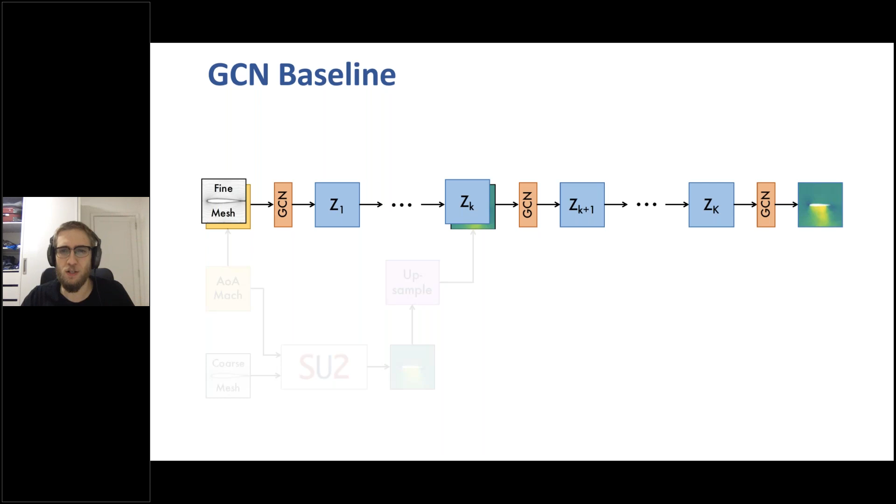We have what's called a pure GCN baseline. This baseline consists just of the GCN layers, and this ensures that the coarse simulation is actually helpful to the performance of the model. On the flip side, we also have a baseline which consists just of the CFD simulation, the coarse simulation without the GCN layers, so we just upsample the coarse simulation and use it as the output. This ensures that the GCN layers are also important to our results. Finally, we also have a baseline in which we do not optimize the coarse mesh, as if we were using a CFD simulator that is not differentiable, unlike SU2.

When compared to the pure GCN baseline, we can see that the baseline actually... actually, before I get into that, let me go back here. It skipped a slide. Okay, let me go to this one first.

We can see that the performance of the pure GCN baseline and the CFD GCN are similar, but the baseline actually outperforms it a little bit. But as we'll see in the next experiment, this is due mostly to overfitting to the distribution seen in training, since the test samples here, though not seen before, come from a similar parameter range and can be interpolated from the training examples.

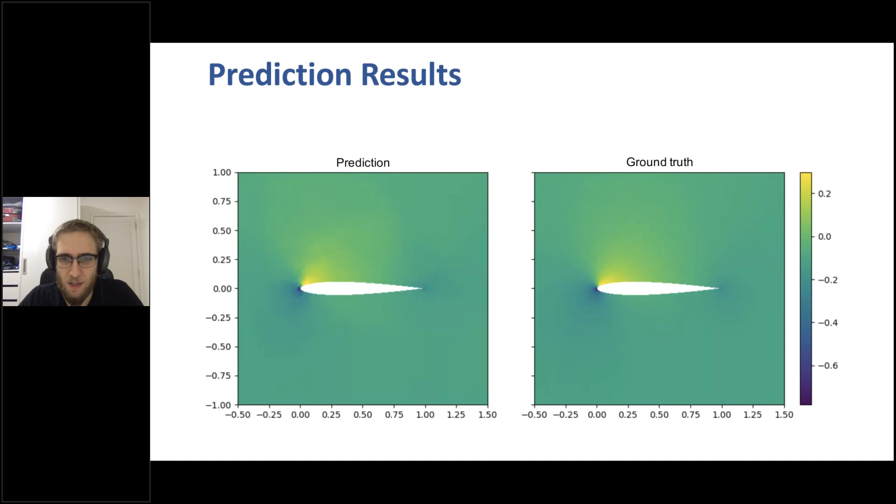In order to show this, in our next experiment we demonstrate the strong generalization abilities of our model by setting up a task very similar to the previous one. In this generalization task, we separate the training and test set such that the training set has examples only with a Mach number smaller than 0.5, and the test set has examples only with a Mach number greater than 0.5. Besides demonstrating the capability to generalize to a quantitatively different range of parameters, this training-test split also generates an important qualitative difference, because at larger Mach numbers, in many cases, shocks are present. Due to this split, these shocks are never seen in training but are seen in testing, presenting a strong test of the generalization ability of our model to unseen behavior.

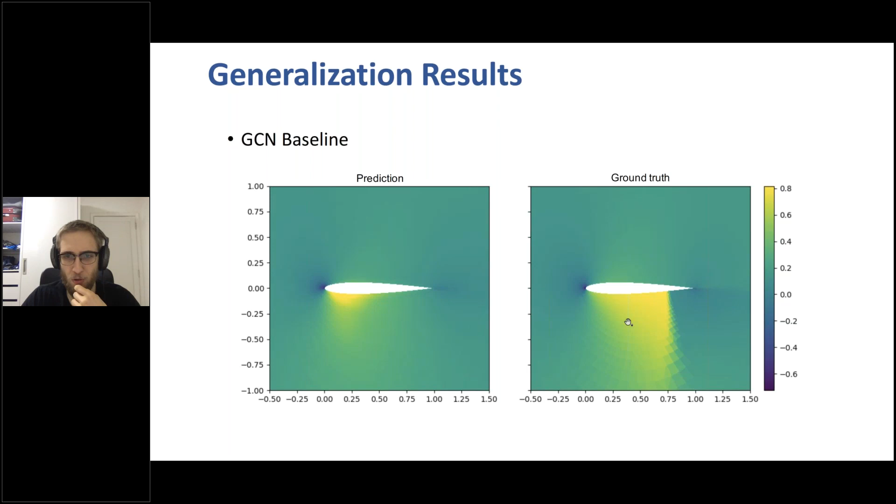Here we see some examples that demonstrate the reason for this better performance. The prediction from the GCN baseline on the test set shows it's not able to pick up on shock behavior it has never seen—it still produces a smooth flow because that's what it's been taught to do. But due to having access to a coarse simulation, the CFD-GCN is able to capture the nature of the shock and make a more accurate prediction, despite never having seen this before in training.

Moreover, when compared to a full-fledged CFD simulation, our model is able to make much faster predictions because it only employs GCNs, which can be run fast on a GPU, along with a much coarser simulation.

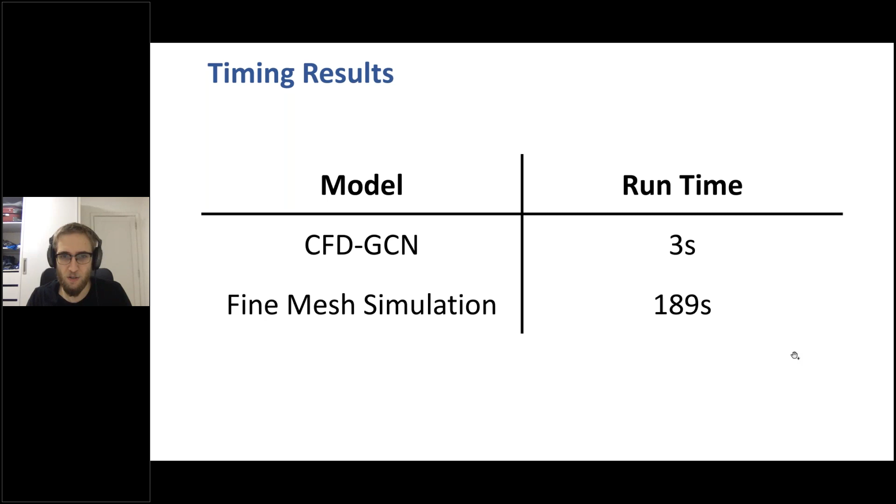To conclude, we have shown that by combining a coarse SU2 simulation and GCN layers into the CFD-GCN model, it is able to work directly on native meshes. It runs faster than a full CFD simulation, and it also generalizes better than a pure deep learning model. That's it—thank you for listening.

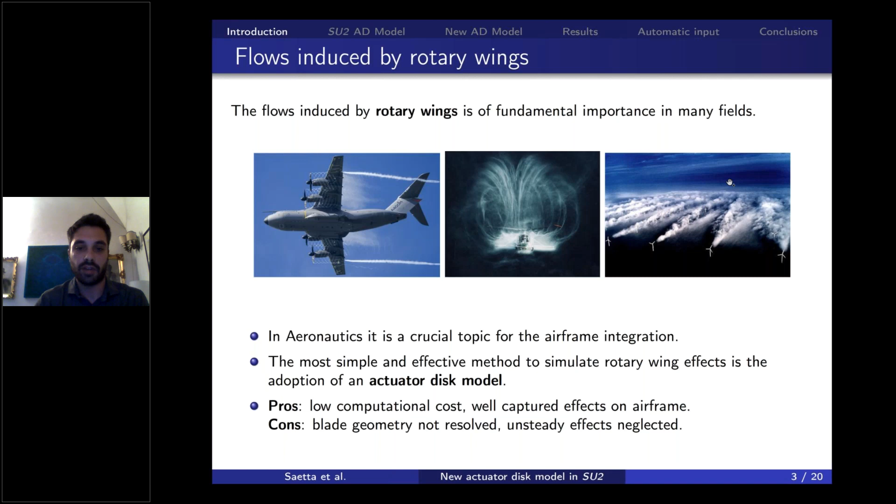The flow induced by rotary wings is of fundamental importance in many sectors, such as aeronautical, helicopters, and renewable energies. In particular, it's a crucial topic in aeronautics for airframe integration. The adoption of an actuator disk model is the most simple and effective method to simulate the effects of rotary wings because of its low computational cost, and it captures the effects on the airframe. However, it neglects the blade geometry and unsteady effects.

All over the world, many research programs are investigating distributed electric propulsion, DEP. The future of propulsion systems is moving in this direction, so a good actuator disk model is of fundamental importance for performance prediction by fast CFD analysis. Also, the Industrial Engineering Department of the University of Naples, Federico II, is collaborating with CIRA on DEP research.

In an actuator disk model, the propeller is considered as a discontinuity surface through which there is a static pressure jump and a tangential velocity jump, and moreover, it induces an axial velocity respecting the continuity equation.

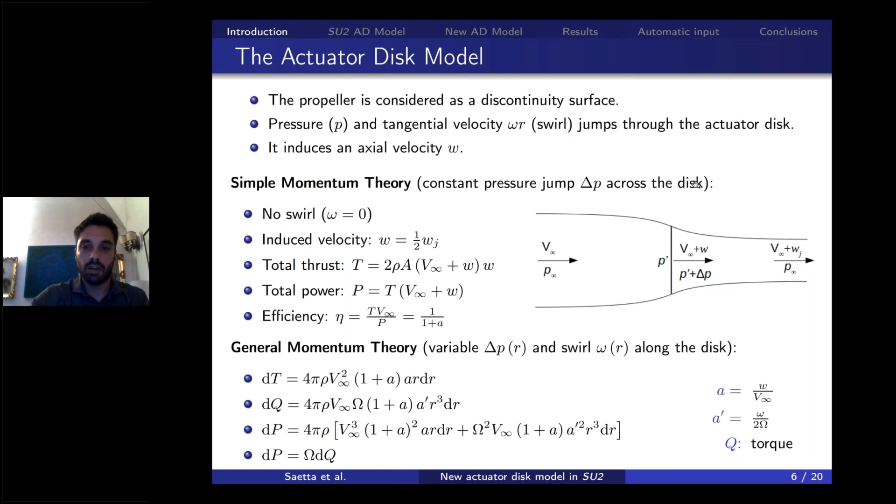As I said, the actuator disk model currently implemented in SU2 is based on the simple momentum theory. So it considers a constant pressure jump. It neglects the swirl term, but it also requires a static temperature jump that is difficult to determine a priori.

Without going into details, here the relations used to obtain the local force per unit area from the input coefficients are reported. In particular, the thrust, power, and radial force coefficients are defined using the Renard relations.

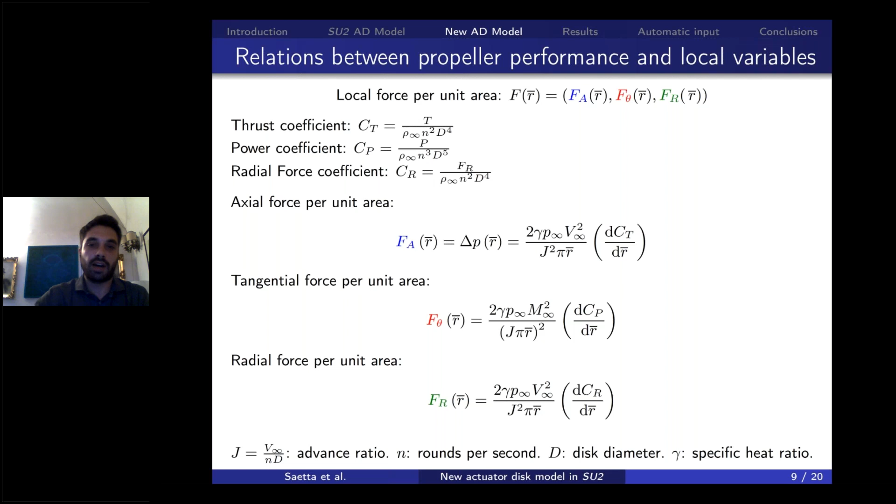In order to implement this new model, we faced the problem of the consistency and stability of the boundary conditions at an interface. For multidimensional problems, there exist theorems that provide only necessary conditions for the stability of the boundary condition. So the guideline is to be consistent with the monodimensional characteristic theory that states that on the interface, we have to extrapolate 2 data from state 1 and 1 data from state 2. Similarly, for 3-dimensional problems, we have to extrapolate 4 data from state 1 and 1 data from state 2.

As regards the local mathematical model for this new actuator disk model, the state 1, which represents an outlet for the domain, has the static pressure imposed while the entropy, the acoustic Riemann invariant, and the tangential velocity are extrapolated. The state 2, which represents an inlet, has the static pressure jump, the continuity equation, and the momentum jump in tangential direction imposed, while the acoustic Riemann invariant is extrapolated.

After the implementation, we validated this model using some test cases provided by CIRA. Here, for brevity, only an actuator disk with a semi-infinite spinner is shown in this presentation. Here we can see the given input, in particular in figures is shown the input in terms of thrust and power coefficients distribution.

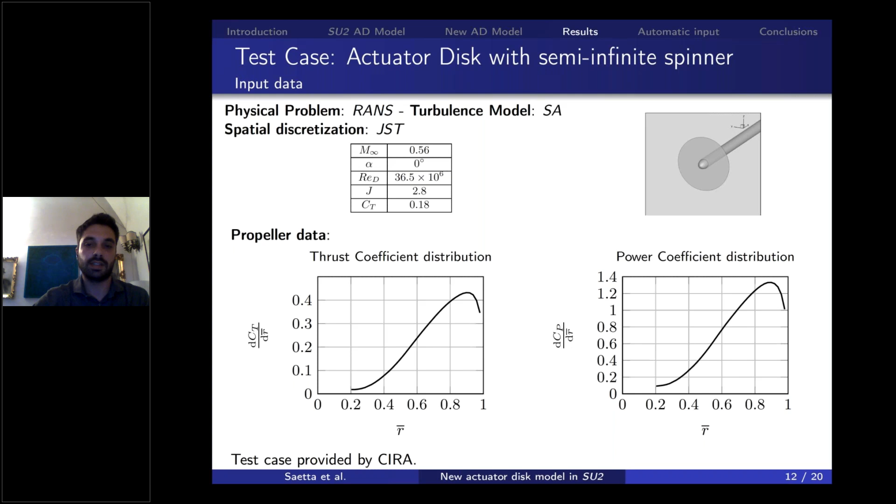We can find a good agreement between the two softwares also as regards the distributions of flow properties in axial direction, and we can appreciate also how the momentum theory is respected.

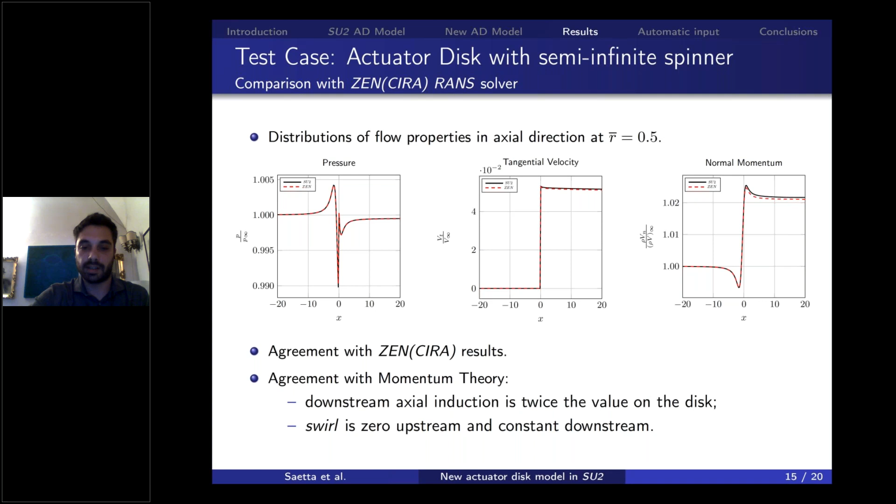So after the validation, this model has been applied to two cases. The first one is a regional turboprop aircraft configuration developed by Leonardo Company within the SCAVIR research program, funded by the Italian Ministry of Research.

The grid is composed of 12 million elements for the half configuration. In this case, the flow is symmetrical, which implies counter-rotating propellers for CPU saving reasons.

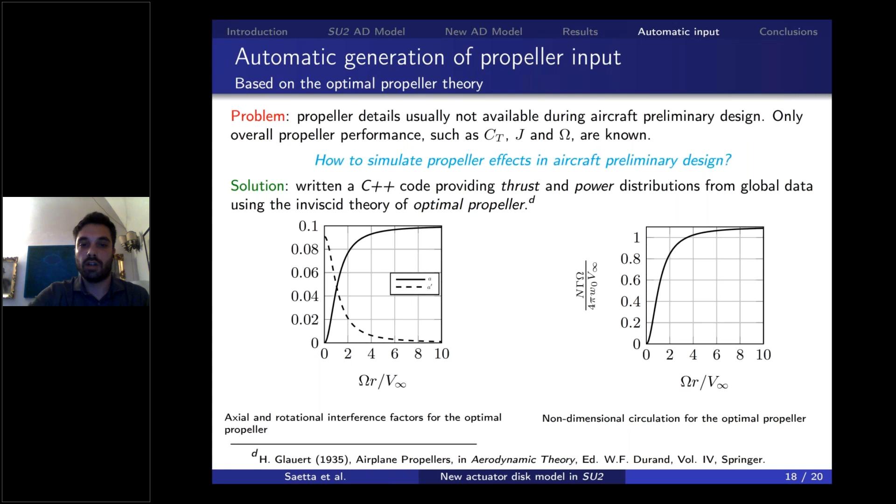In conclusion, we have developed and implemented a new actuator disk model in SU2 with a variable load and swirl along the radius. We validated this model by comparison with CIRA results, and successfully applied it to a regional turboprop aircraft configuration and to a DEP configuration. Finally, we wrote a C++ code to automatically generate the SU2 propeller input based on global data, using the optimal propeller theory.

So what's next? We named the version of SU2 with this new actuator disk model Saetta, the nickname of the Italian Second World War fighter Macchi MC 200. If welcome, we are ready to implement this new actuator disk model in the current official release, SU2 Blackbird. Thanks for your attention, and if there are questions, I will be happy to answer.

Okay, thank you, Ettore. To your final comment there, I think yes, it would be wonderful if you guys are interested in adding your nice contributions to the main line. Feel free to get involved on GitHub, and we can create a branch and maybe start some discussion there, or open a draft pull request. I think that'd be wonderful.

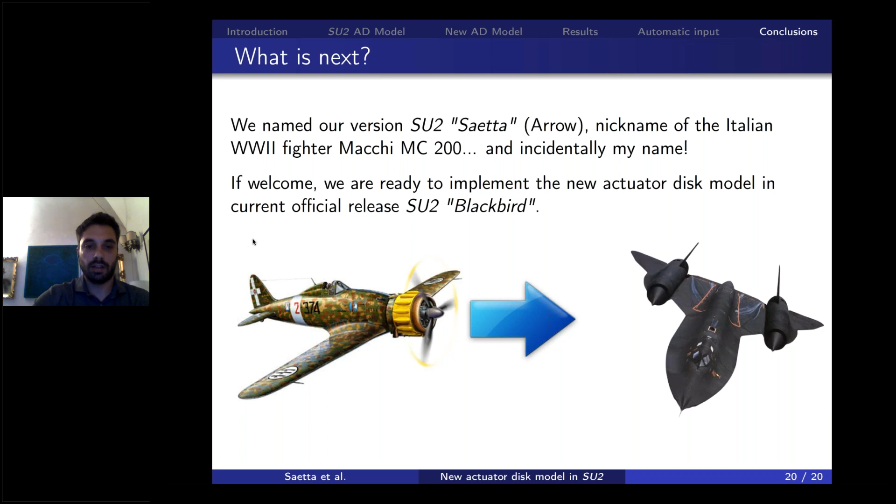Okay, for the aircraft, you mean... I don't know how to go back into the slides. The aircraft, maybe we can page it for you. I think the first of the two, the full aircraft configuration. Yeah, okay, this one is composed of almost 12 million elements. And what was the second question?

Was this inviscid or RANS, or how are you modeling? It's RANS, we use the RANS solver, viscid, and the turbulence model, I guess it was the Spalart-Allmaras. Because this activity was developed within my final thesis for my master's degree, and actually this simulation was run by the research group of Renato Tognaccini, so I don't know the exact details of this simulation for this aircraft, but for sure it runs.

Okay, great. Yeah, in fact somebody else has also left a comment that they're interested in the actuator disk model, because I think at least one other group has been looking at this, and they're asking if you have a particular branch that you've worked on. We can take that offline, but I think there's more evidence there that people would like to collaborate with you on this, so yes, we should talk about that further. Okay, thank you again for a great talk, Ettore, and we'll transition here.

So our next speaker coming up is Nitish, who's joining us from TU Delft. He's going to be talking about aeroelastic 3D optimization of turbomachines. They've been working on this capability quite a bit at TU Delft, so why don't you take it away when you're ready, Nitish? Hey, thanks Tom, thanks for the introduction. Hello guys, I'm Nitish, I'm working as a PhD at Delft University of Technology, and I'm working closely with Matteo and Piero. I'm going to talk about the advancements we have made with respect to 3D aeroelastic optimization using the harmonic balance method. So let's first understand why this is so important, or what is the background behind these kinds of methods.

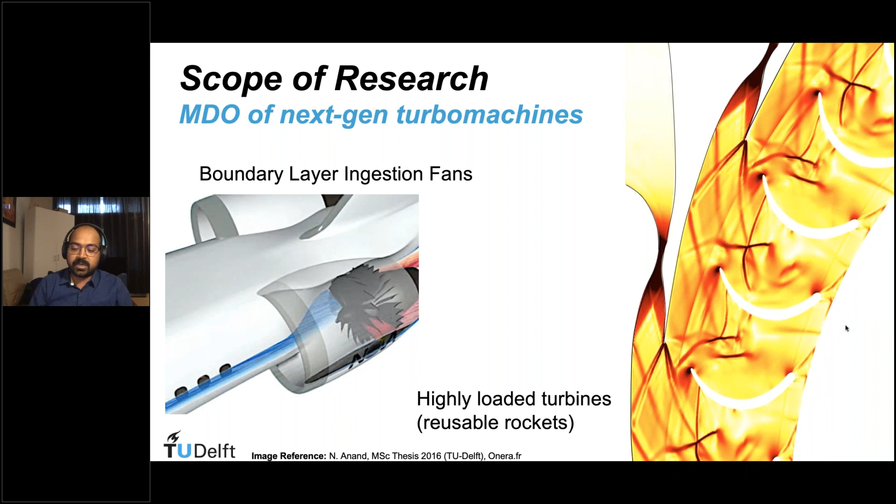So there are a couple of aeroelastic issues, phenomena that generally happen in turbomachines. One is, for example, flutter. Other is forced response, and I'm going to focus more on forced response. So over here you see.

So what is forced response? Forced response is the phenomena in which the blade is vibrating, and the unsteadiness from the fluid adds energy into this vibrating blade, which can increase the amplitude of vibration. Now, with this increase in vibration, the blade can prematurely fail during operation. So the idea is we have to predict which are these locations or frequencies, and to optimize at these operational points so that these kind of phenomena do not occur.

So when this necessary condition is met, when your vibrational frequency is equal to the blade passing frequency, that is the location where you can have a forced response phenomena.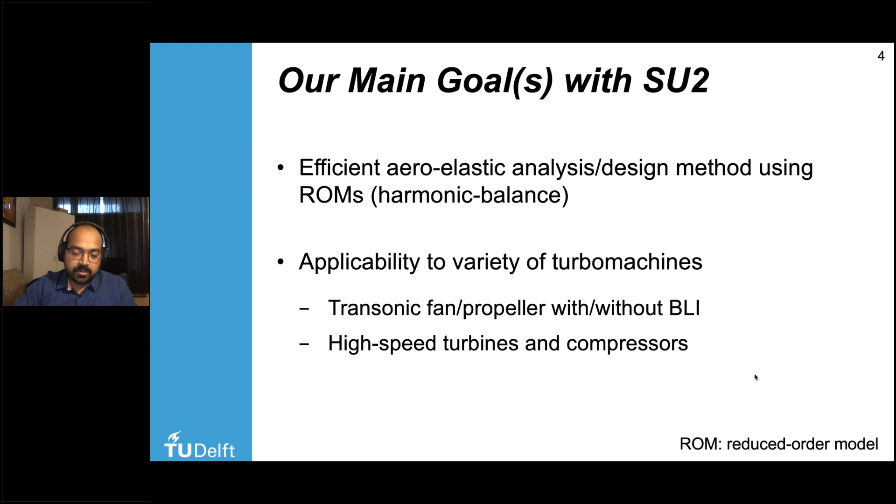In short, we have to resort to reduced order methods like harmonic balance. Application-wise, we want this to be very general so that it can be implemented for designing propellers or for axial compressors, but also high-speed, small-scale turbomachines.

So the current analysis framework that is currently being used for these kind of analysis is called the modal superposition method. And it can be divided into 3 phases: the identification phase, the computation phase, and the structural integrity phase.

In the identification phase, you identify the frequencies at which there can be this kind of crossings. In the computation phase, you do the aerodynamic computation, that is the aero forcing computation and the aero damping computation, which gives you some parameter about the kind of forces or frequencies you are dealing with. And finally, you use this information to construct your equation of motion, based on which you can find your static and alternating stresses, which can ultimately lead you to the life estimate of the turbine.

Obviously, substantiating this entire framework, this chain requires a lot of manual labor, and one design step, or one analysis, can take up to 1 week.

Obviously, this is something that cannot be synthesized as a design chain because of these practical issues. So the alternative to this method is an energy-based method, which balances the energy added by the fluid to the structure and the amount of energy dissipated by the vibrating blade. It focuses on just 3 parts, which are points number 3, 4, and 5, but we have to exclude 1, 2, and step 6.

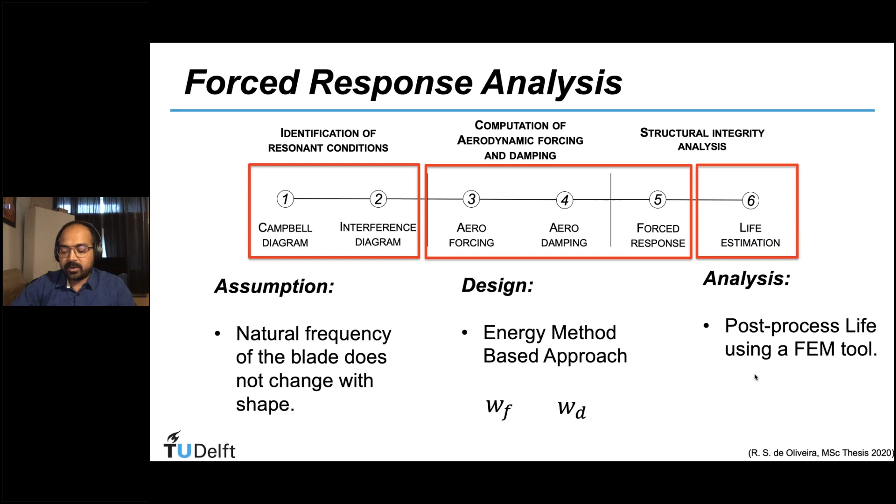By removing steps 1 and 2, we are assuming that when doing the shape optimization, the frequency of the blade does not change, the natural frequency does not change if we change the shape of the blade. By removing step 6, we are just removing one analysis step, but that is something that can be included, which can act as a constraint for our life estimation. So 3, 4, and 5 would be part of our design chain, and we'll go into that in detail.

For us, since we need to get an optimization, we're going to use the energy method I mentioned, which we have developed within the SU2 code. As I mentioned, we have to rely on reduced order methods, for example harmonic balance. You can see why forced response is so attractive for harmonic balance, because forced response can happen at a particular frequency which we know in advance.

This information can be exploited to run quick unsteady computations using harmonic balance. So one primal computation requires 2 unsteady runs: the aero forcing computation and the aero damping computation. This also needs the adjoint because we are interested in doing a gradient-based optimization, so the adjoint computation cost is approximately 3 times one run's computation.

Regarding parameterization, there has been a lot of talk already about this. We also had some problems with parameterization using free-form deformation boxes, especially with respect to imposing geometrical constraints. So for years now, we have been developing this CAD-based parameterization method within our group, and we are proud to make it available open access now over GitHub. It's a parameterization code which uses CAD-based parameters to generate the geometries, with an inbuilt NURBS class which can be utilized to parameterize other geometries, like duct or pipe flows.

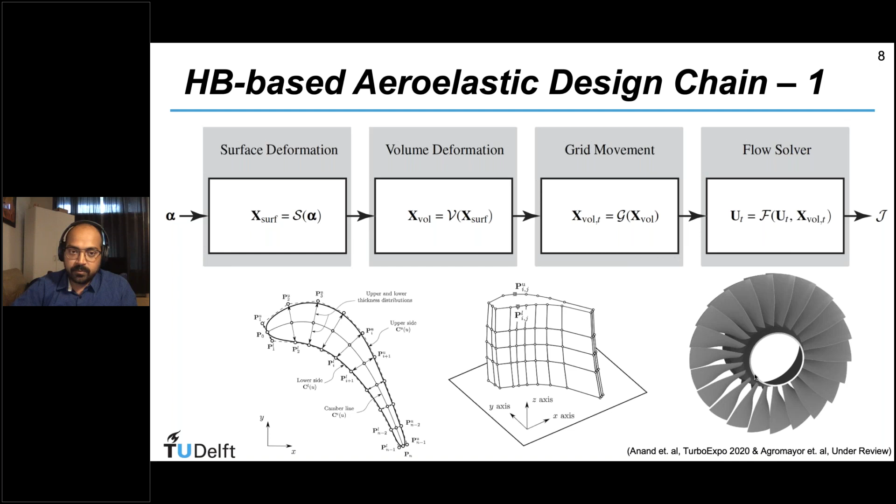For the volume deformation, we're using the standard methods available within SU2, so nothing fancy there. On the other hand, for the grid movement, as I showed, the movement can become very complicated pretty soon. So I have implemented some new methods which accept external files to do the mesh deformation. With this, I can simulate complicated vibrational modes within SU2 using this external code or external file.

For the flow solver, I'm using the solver developed by Antonio Rubino in the past, a previous PhD in our group. The code has been extended to deforming grids, which can simulate the vibratory motion for these kinds of turbomachinery blades.

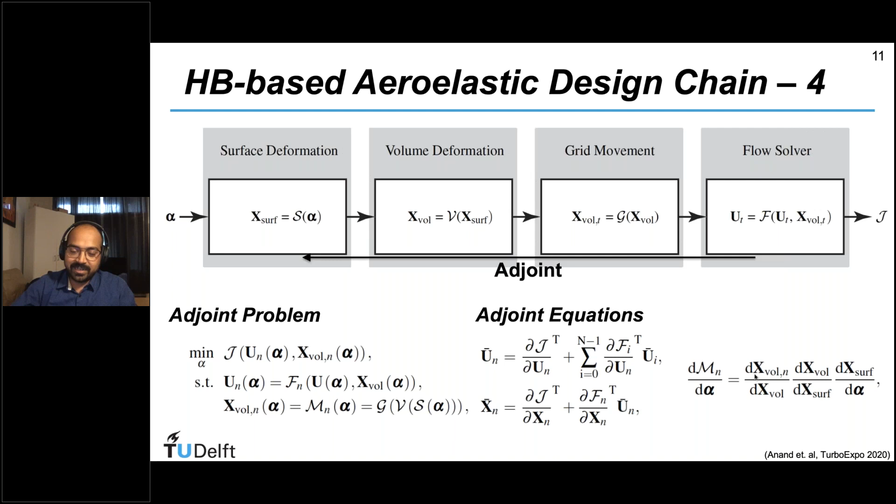A bit on the adjoint equations. I'm not going to go into detail, it's just for the presentation. So if anyone has any question, they can get back to me or find the details in the paper cited at the bottom.

Perfect. So what is the status?

We have this code ready, this entire framework working for 2D and 3D cases for multi-frequency harmonic balance problems. Additionally, with the help of parablade, we can now simulate multiple rows of blades simultaneously with mixing plane or harmonic balance. The branch I'm currently using is a fork of Antonio's, called Feature 3D Turbo Aeroelasticity. The link to the parablade GitHub page is also available here.

Some results: here you see a classical aeroelastic test case performed, or optimization performed, on standard configuration 10, which is a very commonly known aeroelastic test case.

As I mentioned, you need two unsteady simulations. You see the aero forcing computation, in which the blade is not vibrating, it is constant, but it is under the influence of an unsteady flow, unsteady inlet. On the right-hand side, you have the aero damping computation, in which the blade is vibrating, but the inlet conditions are completely uniform. From these two computations, you get the work done per cycle of vibration from aero forcing and aero damping, based on which you can compute the forced response, given as JFR.

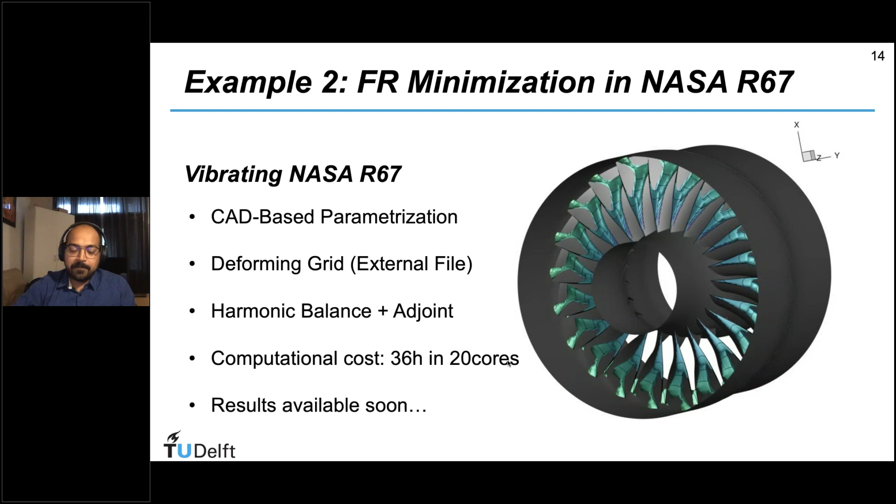Now, these shock waves can induce some vibration and can lead to premature failure of the blade. This is currently running. The computational cost is approximately 36 hours for one design step on 20 cores, and can consume RAM up to 200 GB. The results will be available soon, and when they are, it will be communicated through a publication.

Future perspectives: I think one of the biggest drawbacks we have seen with more and more challenging new 3D test cases is that shock waves are getting very difficult to resolve in internal flow cases. There's an urgency to merge all the turbomachinery features with the develop branch so that we can inherit all the latest developments with respect to the robustness of the code.

The 3D FSI problem is in progress; whenever it's completed, it will be communicated. The CAD-based parameterization is ready for multi-zone problems, harmonic balance, and mixing plane, and we are trying to do some test cases with that to see how the performance is. Finally, we want to do more test cases, more validations with experiments, and have as many optimizations as possible in the coming years.

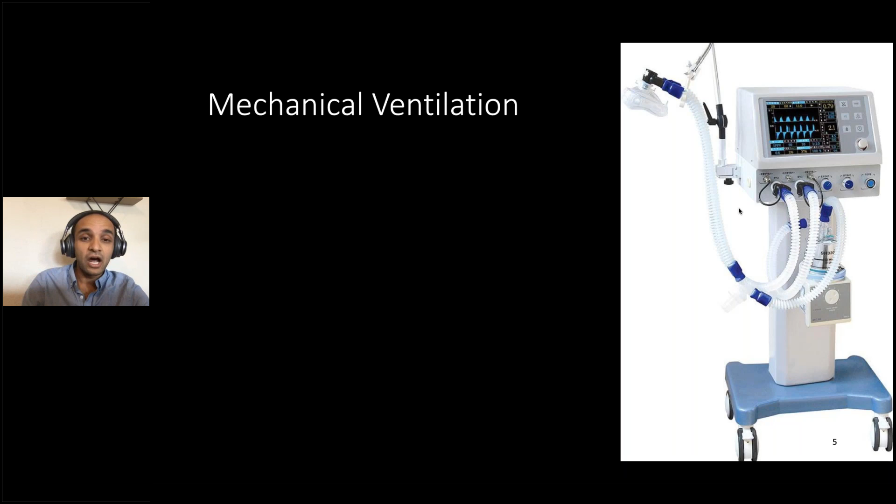So the project started with a crash course in mechanical ventilation. Ventilators are these incredibly complex machines that help patients breathe when they can't do it on their own. This can arise due to a multitude of complications. But in the case of COVID-19, the disease can damage and fatigue the lungs such that the patient is unable to breathe in and breathe out on their own. The ventilator simulates the breathing by forcing air into and out of the lungs, thereby providing fresh oxygenation to the bloodstream. These are incredibly complex machines that can cost up to $50,000 a unit.

They have a lot of electronics on board that actually allow the healthcare worker to fine-tune the ventilation properties specific to the patient in question. Some of the things you could control are the respiratory rate, which is the breaths per minute that the patient is taking, or tidal volume, which is the amount of air given to the patient each inhale. There are a lot of electronics that enable this customization, but it also makes these units extremely expensive. While some countries and hospitals might be able to afford an array of these units, for a large section of the world, operating and running a lot of these units is unaffordable.

So the question that we wanted to solve with this project was: can we create a new design for a ventilator that is mass producible, cheap, and with as few moving parts and electronics as possible?

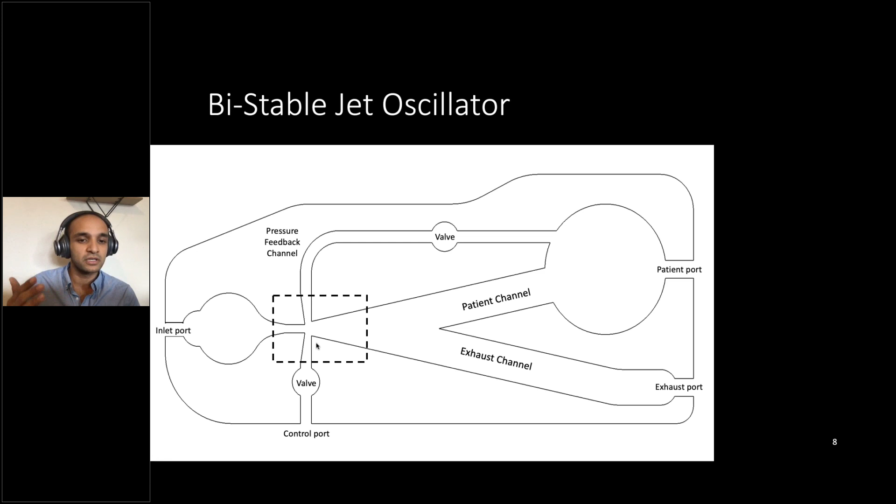In the middle here is where all the magic happens, and that's the fluidic jet oscillation area. You have a plenum that narrows down to speed up the airflow and create a sort of jet in this area. There are two channels above and below that provide a pressure differential that can push the jet of air either towards the patient channel or the exhaust channel.

Let's see what happens when the patient is exhaling. When the patient exhales, there's a high pressure that's created at the patient port. This travels through the pressure feedback channel to the top part of this fluidic jet oscillation area. As you can see here, this high pressure flows in through the pressure feedback tube and pushes the jet towards the bottom wall of the exhaust channel. And here the Coanda effect takes over.

The Coanda effect is the tendency of a jet of air to adhere itself to a surface. So the Coanda effect allows the jet to stick to the bottom channel of the exhaust and go directly to the exhaust port and out of the device.

As you can imagine, the opposite happens when you inhale. A low pressure is created at the patient port, which again travels through the feedback channel and actually pulls the jet of air towards the top of the patient channel and directs it towards the lungs of the patient itself.

What the Fresh Consulting folks were able to do was actually combine this and package this fluidic jet oscillator into a device that is both mass production friendly and is able to be rapidly prototyped using 3D printing. For example, a mold could be created from this design, and these devices could be massively produced using industrial plastic injection molding techniques.

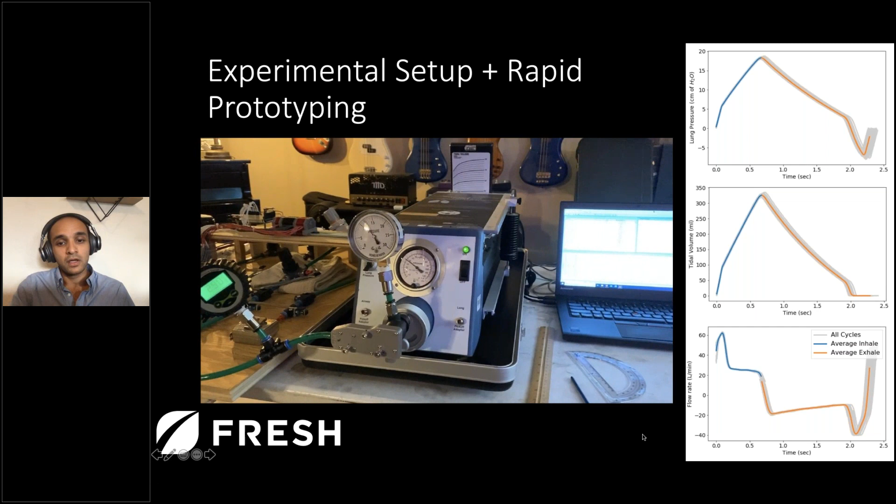And so now we see that the people at Fresh Consulting have a lot of this already done. They have the ability to rapidly prototype. They have a design that nominally works, and they have an experimental setup that can characterize the device performance.

So we wanted to really define what the SU2 community could provide in this project. One of the things that we can do is provide a physics-based background for the device operation, things like the Coanda effect and jet oscillation. Those are things that are in our realm that we can advise upon.

Additionally, running simulations actually reveals some of the internal flow dynamics of the device itself, and we can suggest improvements based on what we see with those simulations.

We also wanted to characterize the effects of the valve positions on the flow rates. These actually control the operation of the ventilation, the breathing rate and tidal volume and things like that. And this is the main sort of control that the health worker would have using this device.

So having all of this, we wanted to start simulating things. The first thing that we do when we simulate is create a mesh and discretize the domain. We did both 2D and 3D simulations.

The 2D was used to do quick turnarounds on simulations and results to really understand what was going on. And the 3D was more sort of a higher fidelity model in this case, where you're doing more expensive simulations, but getting better results. Pointwise was used to generate these meshes, and some degree of mesh automation was used.

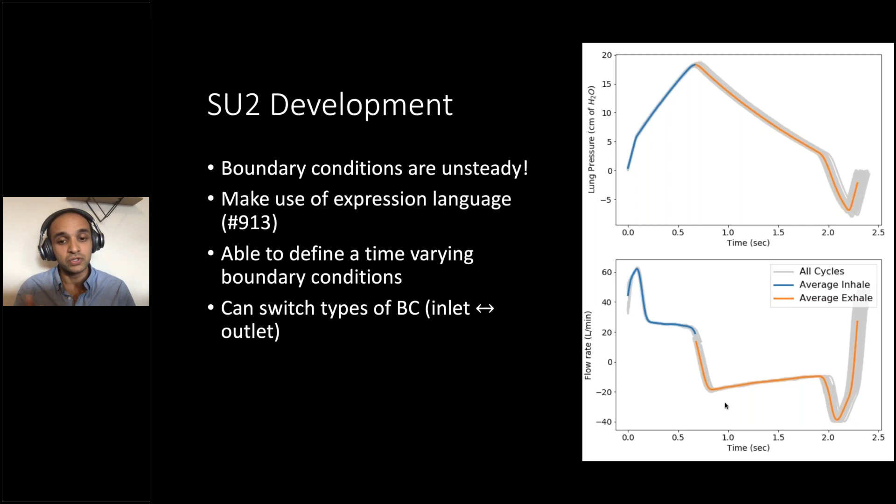You'll see that there is a difference between the length of inhale and exhale, and that's something that is common when ventilators are used. You have longer exhales than inhales.

The next step is trying to validate this using a pressure boundary condition informed by the experimental data collected by the folks at Fresh Consulting. To do that, we moved to the 3D case, and we did these simulations using a model pressure distribution based on the experimental data, but broken up into 4 piecewise linear pressure distributions.

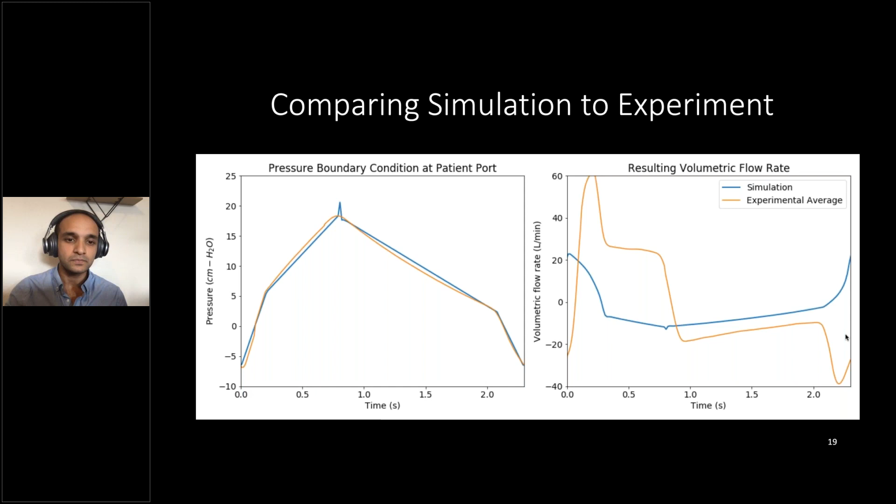So we suggested removing that plenum and just having a jet that goes directly into the jet oscillation area. That stabilized the flow response to the pressure changes, and this was seen in the experiments done by Fresh Consulting.

Another thing we realized, born more out of experimental work, was that we needed more control on the ventilation properties like respiratory rate and tidal volume, so this device could be used productively in the hospital setting. Increasing the number of set screws helped us improve that aspect of the ventilator as well.

Just some takeaways from this project. The first, and I really cannot stress this enough, the SU2 community can mobilize very quickly. Going from one email to running simulations took almost less than a week, and that was really amazing to see.

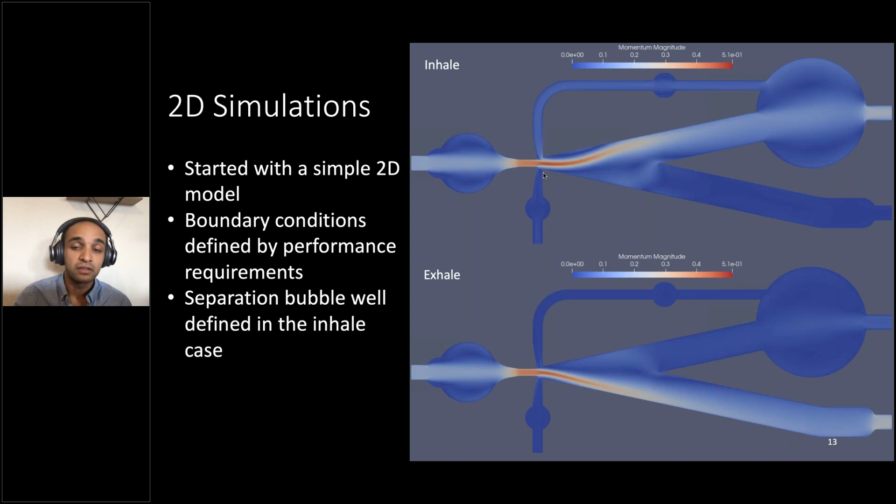Yeah, so the 2D simulations were useful in nailing things down, like the boundary conditions and some simple flow physics of the simulations here. We were able to nail down boundary conditions and see how the flow is at the throat. But these do not represent the cross-sectional area changes that we could see with the 3D model, which is in the next slide, where you have these massive cross-sectional changes that cause huge recirculation regions. So the 3D models were useful in actually getting good flow rate data and pressure information, but the 2D simulations were quicker and useful in nailing down solver parameters, for example, and that was super nice.

Okay, there are a couple of questions related to the boundary conditions, so I'll combine them into one. Somebody was asking if the reversible boundary condition is applied to the whole patch and whether you could do a subset. And someone else asked if a different boundary condition would make more sense at the patient port.

Yeah, so it is actually applied to the whole patch, and currently it switches based on time. What we would want to do is switch it based on the average mass flow rate at the patient port. So as soon as it goes from being positive to negative, switch it from being inlet to outlet, for example.

And in terms of another boundary condition, we did some preliminary research into what could work if you have flow that is going in and out. And we found it simpler to just use the current implementations in SU2, but have it switch between the two. If you have any suggestions on new boundary conditions, by all means please reach out. There's a Slack channel on SU2 called the Worldwide Ventilator. Please feel free to join that and contribute to this project if you do.